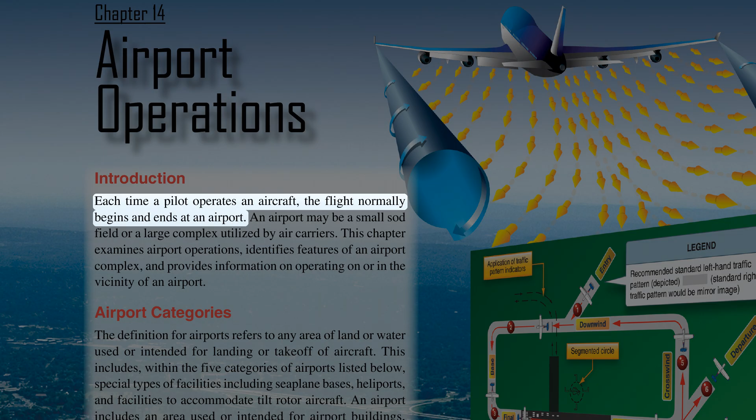Chapter 14, Airport Operations. Introduction. Each time a pilot operates an aircraft, the flight normally begins and ends at an airport. An airport may be a small sod field or a large complex utilized by air carriers. This chapter examines airport operations, identifies features of an airport complex, and provides information on operating on or in the vicinity of an airport.

Airport categories. The definition for airports refers to any area of land or water used or intended for landing or takeoff of aircraft. This includes, within the 5 categories of airports listed below, special types of facilities including seaplane bases, heliports, and facilities to accommodate tilt-rotor aircraft.

An airport includes an area used or intended for airport buildings, facilities, as well as rights-of-way together with the buildings and facilities. The law defines airports by categories of airport activities, including commercial service, primary, cargo service, reliever, and general aviation airports, as shown below.

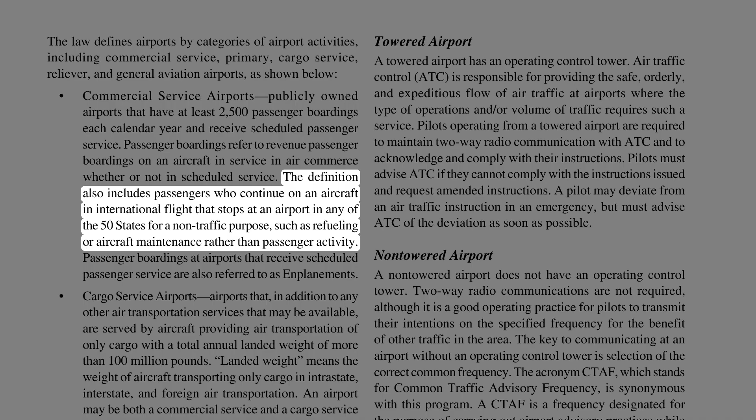Commercial service airports: publicly owned airports that have at least 2,500 passenger boardings each calendar year and receive scheduled passenger service. Passenger boardings refer to revenue passenger boardings on an aircraft in service in air commerce, whether or not in scheduled service. The definition also includes passengers who continue on an aircraft in international flight that stops at an airport in any of the 50 states for a non-traffic purpose, such as refueling or aircraft maintenance rather than passenger activity. Passenger boardings at airports that receive scheduled passenger service are also referred to as enplanements.

Cargo service airports: airports that, in addition to any other air transportation services that may be available, are served by aircraft providing air transportation of only cargo with a total annual landed weight of more than 100 million pounds. Landed weight means the weight of aircraft transporting only cargo in intrastate, interstate, and foreign air transportation. An airport may be both a commercial service and a cargo service airport.

Reliever airports: airports designated by the FAA to relieve congestion at commercial service airports and to provide improved general aviation access to the overall community. These may be publicly or privately owned. General aviation airports: the remaining airports are commonly described as general aviation airports. This airport type is the largest single group of airports in the U.S. system. The category also includes privately owned, public-use airports that enplane 2,500 or more passengers annually and receive scheduled airline service.

Types of airports. There are 2 types of airports, towered and non-towered. These types can be further subdivided to civil airports, airports that are open to the general public; military/federal government airports, airports operated by the military, the National Aeronautics and Space Administration (NASA), or other agencies of the federal government; and private airports, airports designated for private or restricted use only, not open to the general public.

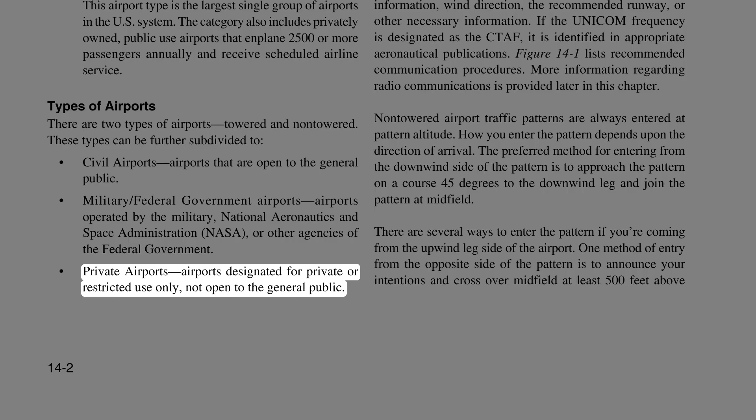Towered airport. A towered airport has an operating control tower. Air traffic control (ATC) is responsible for providing the safe, orderly, and expeditious flow of air traffic at airports where the type of operations and/or volume of traffic requires such a service. Pilots operating from a towered airport are required to maintain 2-way radio communication with ATC and to acknowledge and comply with their instructions. Pilots must advise ATC if they cannot comply with the instructions issued and request amended instructions. A pilot may deviate from an air traffic instruction in an emergency, but must advise ATC of the deviation as soon as possible.

Non-towered airport. A non-towered airport does not have an operating control tower. 2-way radio communications are not required, although it is a good operating practice for pilots to transmit their intentions on the specified frequency for the benefit of other traffic in the area. The key to communicating at an airport without an operating control tower is selection of the correct common frequency. The acronym CTAF, which stands for Common Traffic Advisory Frequency, is synonymous with this program. A CTAF is a frequency designated for the purpose of carrying out airport advisory practices while operating to or from an airport without an operating control tower.

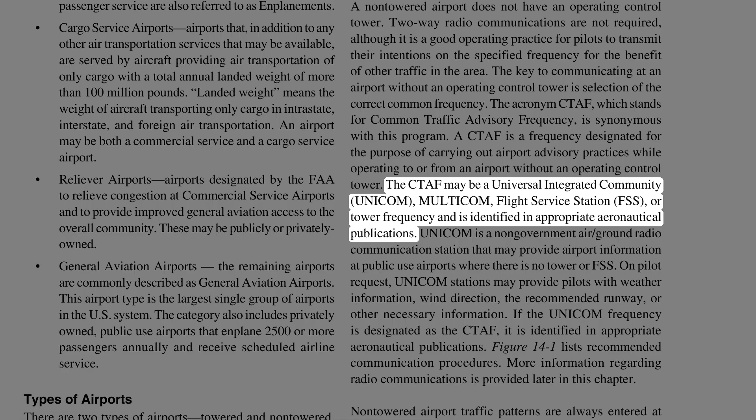The CTAF may be a Universal Integrated Community (UNICOM), MULTICOM, Flight Service Station (FSS), or tower frequency and is identified in appropriate aeronautical publications. UNICOM is a non-government air-ground radio communication station that may provide airport information at public-use airports where there is no tower or FSS. On pilot request, UNICOM stations may provide pilots with weather information, wind direction, the recommended runway, or other necessary information. If the UNICOM frequency is designated as the CTAF, it is identified in appropriate aeronautical publications. Figure 14-1 lists recommended communication procedures. More information regarding radio communications is provided later in this chapter.

Non-towered airport traffic patterns are always entered at pattern altitude. How you enter the pattern depends upon the direction of arrival. The preferred method for entering from the downwind side of the pattern is to approach on a course 45 degrees to the downwind leg and join the pattern at midfield.

There are several ways to enter the pattern if you're coming from the upwind leg side of the airport. One method of entry from the opposite side of the pattern is to announce your intentions and cross over midfield at least 500 feet above pattern altitude, normally 1,500 feet AGL. However, if large or turbine aircraft operate at your airport, it is best to remain 2,000 feet AGL so you are not in conflict with their traffic pattern.

When well clear of the pattern, approximately 2 miles, scan carefully for traffic, descend to pattern altitude, then turn right to enter at 45 degrees to the downwind leg at midfield.

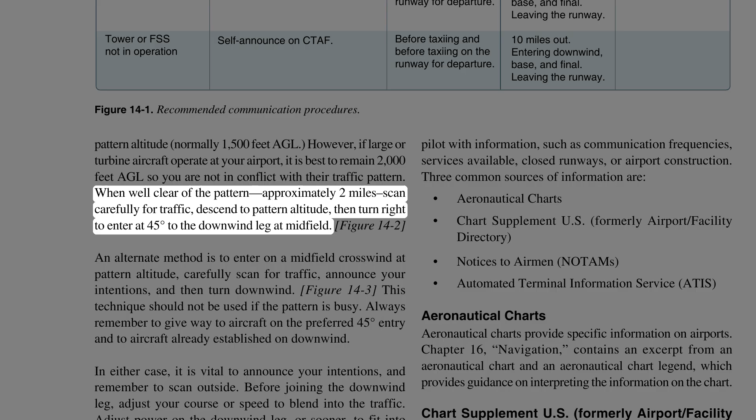An alternate method is to enter on a midfield crosswind at pattern altitude, carefully scan for traffic, announce your intentions, and then turn downwind. This technique should not be used if the pattern is busy. Always remember to give way to aircraft on the preferred 45 degree entry and to aircraft already established on downwind. In either case, it is vital to announce your intentions, and remember to scan outside.

Before joining the downwind leg, adjust your course or speed to blend into the traffic. Adjust power on the downwind leg, or sooner, to fit into the flow of traffic. Avoid flying too fast or too slow. Speeds recommended by the airplane manufacturer should be used. They will generally fall between 70 to 80 knots for fixed-gear singles and 80 to 90 knots for high-performance retractables.

Sources for airport data. When a pilot flies into a different airport, it is important to review the current data for that airport. This data provides the pilot with information such as communication frequencies, services available, closed runways, or airport construction. Three common sources of information are Aeronautical charts, the Chart Supplement US, formerly the Airport Facility Directory, Notices to Airmen (NOTAMs), and the Automated Terminal Information Service (ATIS).

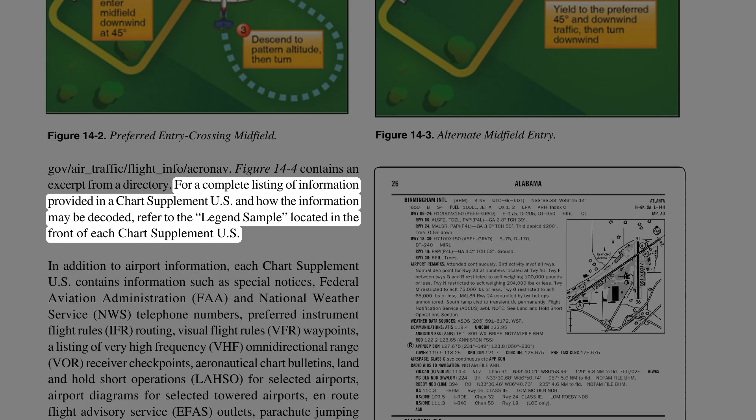Figure 14-4 contains an excerpt from a directory. For a complete listing of information provided in a Chart Supplement US and how the information may be decoded, refer to the legend sample located in the front of each Chart Supplement US. In addition to airport information, each Chart Supplement US contains information such as special notices, FAA, and

National Weather Service telephone numbers, preferred IFR routing, VFR waypoints, a listing of VOR receiver checkpoints, aeronautical chart bulletins, land and hold short operations (LAHSO) for selected airports, airport diagrams for selected towered airports, en route flight advisory service (EFAS) outlets, parachute jumping areas, and facility telephone numbers. It is beneficial to review a Chart Supplement US to become familiar with the information it contains.

Notices to Airmen, NOTAM. Time-critical aeronautical information, which is of a temporary nature and not sufficiently known in advance to permit publication on aeronautical charts or in other operational publications, receives immediate dissemination by the NOTAM system. The NOTAM information could affect your decision to make the flight. It includes information such as taxiway and runway closures, construction, communications, changes in status of navigational aids, and other information essential to planned en route, terminal, or landing operations.

Exercise good judgment and common sense by carefully regarding the information readily available in NOTAMs. Prior to any flight, pilots should check for any NOTAMs that could affect their intended flight. For more information on NOTAMs, refer back to Chapter 1, Pilot and Aeronautical Information section.

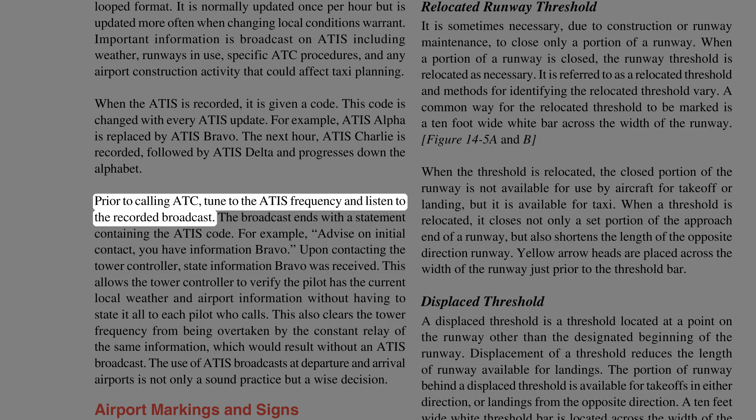Prior to calling ATC, tune to the ATIS frequency and listen to the recorded broadcast. The broadcast ends with a statement containing the ATIS code. For example, advise on initial contact you have information Bravo. Upon contacting the tower controller, state information Bravo was received.

This allows the tower controller to verify the pilot has the current local weather and airport information without having to state it all to each pilot who calls. This also clears the tower frequency from being overtaken by the constant relay of the same information, which would result without an ATIS broadcast. The use of ATIS broadcasts at departure and arrival airports is not only a sound practice but a wise decision.

Airport markings and signs provide directions and assist pilots in airport operations. It is important for you to know the meanings of the signs, markings, and lights used on airports as surface navigational aids.

All airport markings are painted on the surface, whereas some signs are vertical and some are painted on the surface. An overview of the most common signs and markings is described on the following pages. Additional information may be found in Chapter 2, Aeronautical Lighting and Other Airport Visual Aids, of the Aeronautical Information Manual, the AIM.

Runway markings and signs vary depending on the type of operations conducted at the airport. A basic VFR runway may only have centerline markings and runway numbers. Refer to Appendix C of this publication for an example of the most common runway markings found at airports.

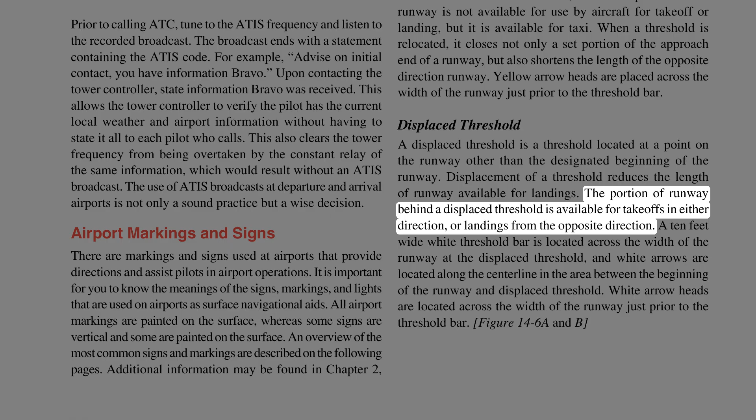Displaced threshold: a displaced threshold is a threshold located at a point on the runway other than the designated beginning of the runway. Displacement of a threshold reduces the length of runway available for landings. The portion of runway behind a displaced threshold is available for takeoffs in either direction, or landings from the opposite direction. A 10-foot wide white threshold bar is located across the width of the runway at the displaced threshold, and white arrows are located along the centerline in the area between the beginning of the runway and the displaced threshold. White arrowheads are located across the width of the runway just prior to the threshold bar.

Runway safety area, or RSA, is a defined surface surrounding the runway prepared, or suitable, for reducing the risk of damage to airplanes in the event of an undershoot, overshoot, or excursion from the runway. The dimensions of the RSA vary and can be determined using the criteria contained within AC 150/5300-13, Airport Design, Chapter 3.

Figure 3-1 in AC 150/5300-13 depicts the RSA. Additionally, it provides greater accessibility for firefighting and rescue equipment in emergency situations. The RSA is typically graded and mowed. Its lateral boundaries are usually identified by the presence of the runway holding position signs and markings on the adjoining taxiway stubs.

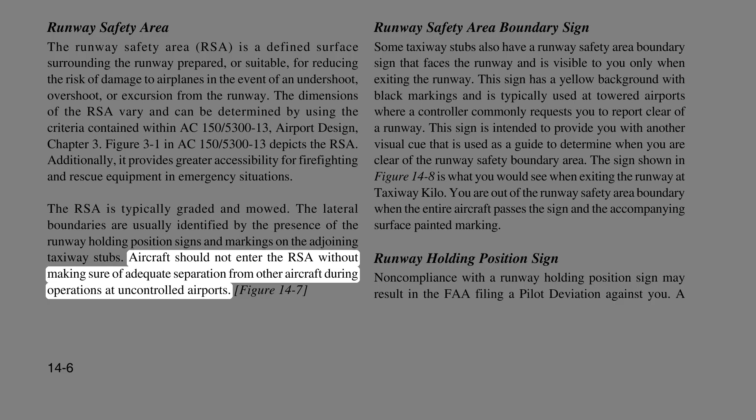Aircraft should not enter the RSA without making sure of adequate separation from other aircraft during operations at uncontrolled airports. Runway Safety Area Boundary Sign: some taxiway stubs also have a runway safety area boundary sign that faces the runway and is visible to you only when exiting the runway.

This sign has a yellow background with black markings and is typically used at towered airports, where a controller commonly requests you to report clear of the runway. This sign is intended to provide you with another visual cue used as a guide to determine when you are clear of the runway safety boundary area.

The sign shown in Figure 14-8 is what you would see when exiting the runway at Taxiway Kilo. You are out of the runway safety area boundary when the entire aircraft passes the sign and the accompanying surface painted marking. Next is the runway holding position sign.

Noncompliance with a runway holding position sign may result in the FAA filing a pilot deviation against you. A runway holding position sign is an airport version of a stop sign. It may be seen as a sign and/or its characters painted on the airport pavement. The sign has white characters outlined in black on a red background. It is always collocated with the surface-painted holding position markings and is located where taxiways intersect runways.

On taxiways that intersect the threshold of the takeoff runway, only the designation of the runway may appear on the sign. If a taxiway intersects a runway somewhere other than at the threshold, the sign has the designation of the intersecting runway. The runway numbers on the sign are arranged to correspond to the relative location of the respective runway thresholds. Figure 14-10 shows 18-36, to indicate the threshold for runway 18 is to the left and the threshold for runway 36 is to the right. The sign also indicates that you are located on taxiway Alpha.

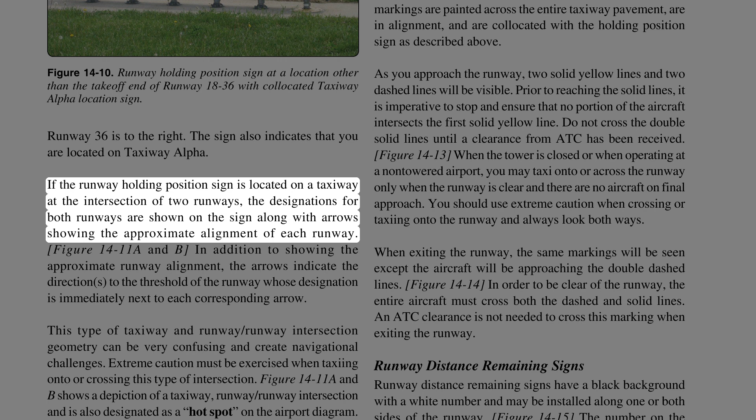If the runway holding position sign is located on a taxiway at the intersection of two runways, the designations for both runways are shown on the sign along with arrows showing the approximate alignment of each runway, as seen in Figure 14-11A and B. In addition to showing the approximate runway alignment, the arrows indicate the directions to the threshold of the runway whose designation is immediately next to each corresponding arrow. This type of taxiway and runway intersection geometry can be very confusing and create navigational challenges. Extreme caution must be exercised when taxiing onto or crossing this type of intersection. Figure 14-11A and B shows a depiction of a taxiway, runway intersection and is also designated as a hotspot on the airport diagram. In the example, taxiway Bravo intersects with two runways, 31-13 and 35-17, which cross each other.

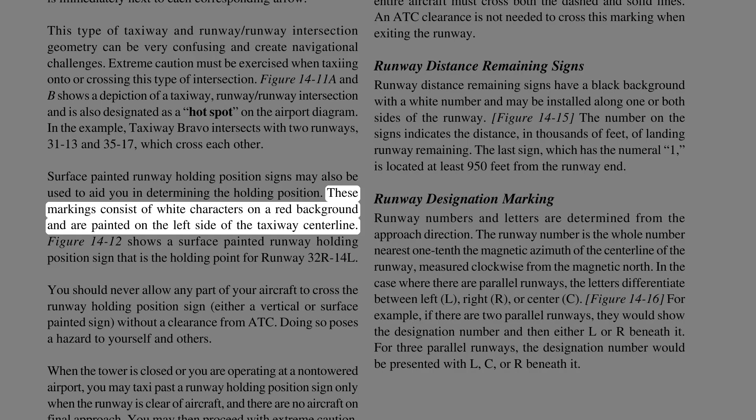Surface-painted runway holding position signs may also be used to aid you in determining the holding position. These markings consist of white characters on a red background and are painted on the left side of the taxiway centerline. Figure 14-12 shows a surface-painted runway holding position sign that is the holding point for runway 32R-14L.

You should never allow any part of your aircraft to cross the runway holding position sign, either a vertical or surface-painted sign, without a clearance from ATC. Doing so poses a hazard to yourself and others. When the tower is closed or you are operating at a non-towered airport, you may taxi past a runway holding position sign only when the runway is clear of aircraft, and there are no aircraft on final approach. You may then proceed with extreme caution.

Runway holding position marking. Noncompliance with a runway holding position marking may result in the FAA filing a pilot deviation against you. Runway holding position markings consist of 4 yellow lines, 2 solid and 2 dashed, that are painted on the surface and extend across the width of the taxiway to indicate where the aircraft should stop when approaching a runway. These markings are painted across the entire taxiway pavement, are in alignment, and are collocated with the holding position sign as described above. As you approach the runway, 2 solid yellow lines and 2 dashed lines will be visible. Prior to reaching the solid lines, it is imperative to stop and ensure that no portion of the aircraft intersects the first solid yellow line.

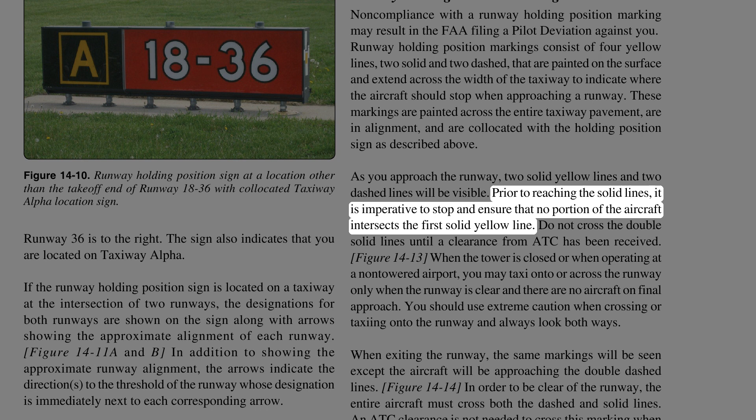Do not cross the double solid lines until a clearance from ATC has been received. When the tower is closed or when operating at a non-towered airport, you may taxi onto or across the runway only when the runway is clear and there are no aircraft on final approach. You should use extreme caution when crossing or taxiing onto the runway and always look both ways. When exiting the runway, the same markings will be seen except the aircraft will be approaching the double dashed lines. In order to be clear of the runway, the entire aircraft must cross both the dashed and solid lines. An ATC clearance is not needed to cross this marking when exiting the runway.

Runway distance remaining signs. Runway distance remaining signs have a black background with a white number and may be installed along one or both sides of the runway. The number on the signs indicates the distance, in thousands of feet, of landing runway remaining. The last sign, which has the numeral 1, is located at least 950 feet from the runway end.

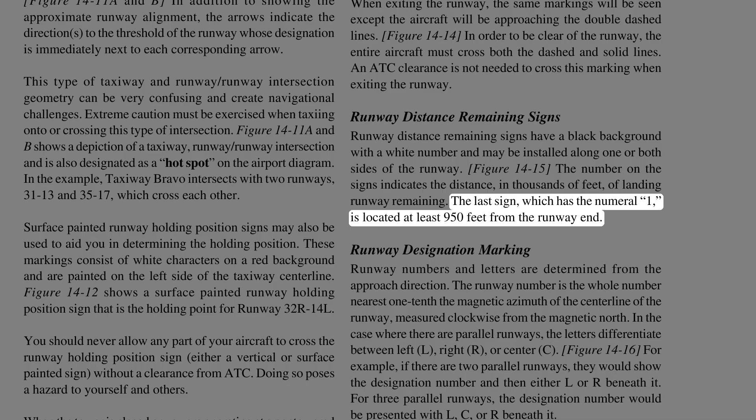Runway designation marking. Runway numbers and letters are determined from the approach direction. The runway number is the whole number nearest 1/10 the magnetic azimuth of the centerline of the runway, measured clockwise from magnetic north. In the case where there are parallel runways, the letters differentiate between left, L, right, R, or center, C. For example, if there are 2 parallel runways, they would show the designation number and then either L or R beneath it. For 3 parallel runways, the designation number would be presented with L, C, or R beneath it. Figure 14-11, A.

Taxiway Bravo location sign collocated with runway intersection holding signs at Sioux Gateway Airport, SUX. This is the airport diagram of Sioux Gateway Airport, SUX, in Sioux City, Iowa.

The area outlined in red is a designated hotspot, HS1. This relates to land and hold short operations, LAHSO.

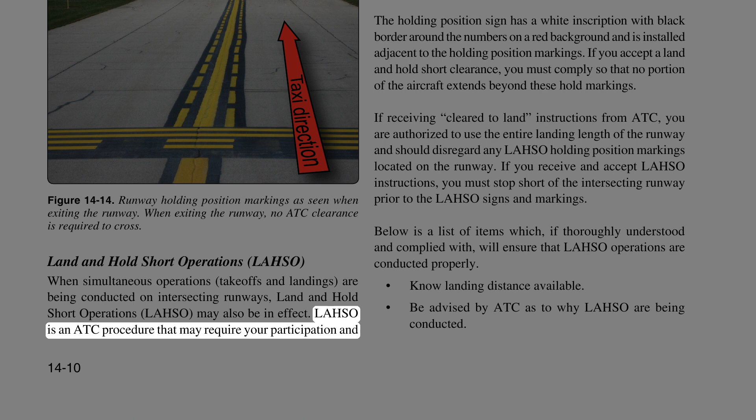When simultaneous operations, takeoffs and landings, are being conducted on intersecting runways, land and hold short operations, LAHSO, may also be in effect. LAHSO is an ATC procedure that may require your participation and compliance. As pilot in command, PIC, you have the final authority to accept or decline any LAHSO clearance. If issued a land and hold short clearance, you must be aware of the reduced runway distances and whether or not you can comply before accepting the clearance. You do not have to accept a LAHSO clearance.

Pilots should only receive a LAHSO clearance when there is a minimum ceiling of 1,000 feet and 3 statute miles of visibility. Runway holding position signs and markings are installed on those runways used for LAHSO. The signs and markings are placed at the LAHSO point to aid you in determining where to stop and hold the aircraft, and are located prior to the runway intersection.

The holding position sign has a white inscription with a black border around the numbers on a red background, and is installed adjacent to the holding position markings. If you accept a land and hold short clearance, you must comply so that no portion of the aircraft extends beyond these hold markings. If receiving cleared to land instructions from ATC, you are authorized to use the entire landing length of the runway and should disregard any LAHSO holding position markings located on the runway.

If you receive and accept LAHSO instructions, you must stop short of the intersecting runway prior to the LAHSO signs and markings. Below is a list of items which, if thoroughly understood and complied with, will ensure that LAHSO operations are conducted properly, including know landing distance available.

Be advised by ATC as to why LAHSO are being conducted. Advise ATC if you cannot comply with LAHSO. Know what signs and markings are at the LAHSO point.

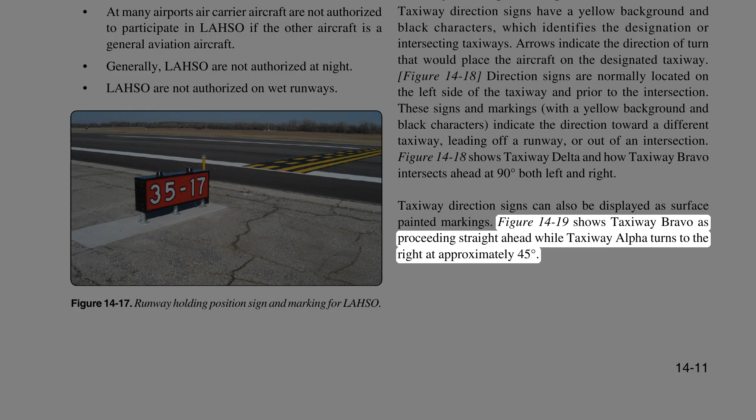Figure 14-18 shows Taxiway Delta and how Taxiway Bravo intersects ahead at 90 degrees, both left and right. Taxiway direction signs can also be displayed as surface painted markings. Figure 14-19 shows Taxiway Bravo proceeding straight ahead, while Taxiway Alpha turns to the right at approximately 45 degrees. Figure 14-20A and B shows an example of a direction sign at a complex taxiway intersection.

Figure 14-20A and B shows Taxiway Bravo intersecting with Taxiway Sierra at 90 degrees, but at 45 degrees with Taxiway Foxtrot. This type of array can be displayed with or without the taxiway location sign, which in this case would be Taxiway Bravo.

Enhanced taxiway centerline markings: at most towered airports, the enhanced taxiway centerline marking is used to warn you of an upcoming runway. It consists of yellow dashed lines on either side of the normal solid taxiway centerline, and the dashes extend up to 150 feet prior to a runway holding position marking, as shown in Figure 14-21A and B. They are used to aid you in maintaining awareness during surface movement to reduce runway incursions.

Destination signs have black characters on a yellow background, indicating a destination at the airport. These signs always have an arrow showing the direction of the taxi route to that destination. When the arrow on the destination sign indicates a turn, the sign is located prior to the intersection.

Destinations commonly shown on these types of signs include runways, aprons, terminals, military areas, civil aviation areas, cargo areas, international areas, and fixed base operators. When the inscription for two or more destinations having a common taxi route are placed on a sign, the destinations are separated by a dot, and one arrow would be used, as shown in Figure 14-22.

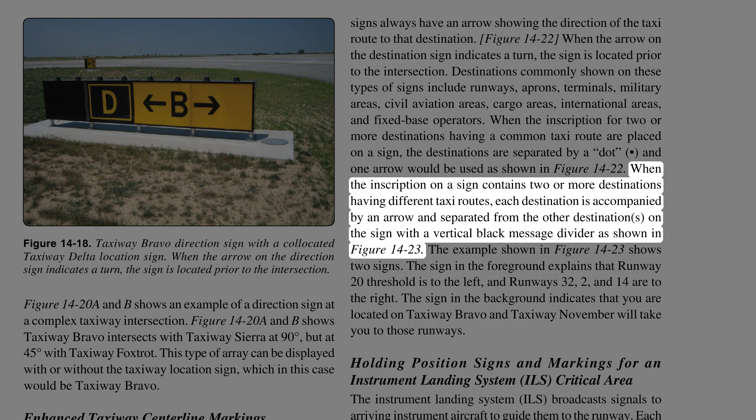When the inscription on a sign contains two or more destinations having different taxi routes, each destination is accompanied by an arrow and separated from the other destinations on the sign with a vertical black message divider, as shown in Figure 14-23.

The example shown in figure 14-23 shows two signs. The sign in the foreground explains that runway 20 threshold is to the left, and runways 32, 2, and 14 are to the right. The sign in the background indicates that you are located on Taxiway Bravo and Taxiway November will take you to those runways.

Holding position signs and markings for an instrument landing system, ILS, critical area. The instrument landing system, ILS, broadcasts signals to arriving instrument aircraft to guide them to the runway. Each of these ILSs have critical areas that must be kept clear of all obstacles in order to ensure quality of the broadcast signal. At many airports, taxiways extend into the ILS critical area. Most of the time, this is of no concern.

However, during times of poor weather, an aircraft on approach may depend on a good signal quality. When necessary, ATC will protect the ILS critical area for arrival instrument traffic by instructing taxiing aircraft to hold short of runway XX ILS critical area. The ILS critical area hold sign has white characters, outlined in black, on a red background and is installed adjacent to the ILS holding position markings.

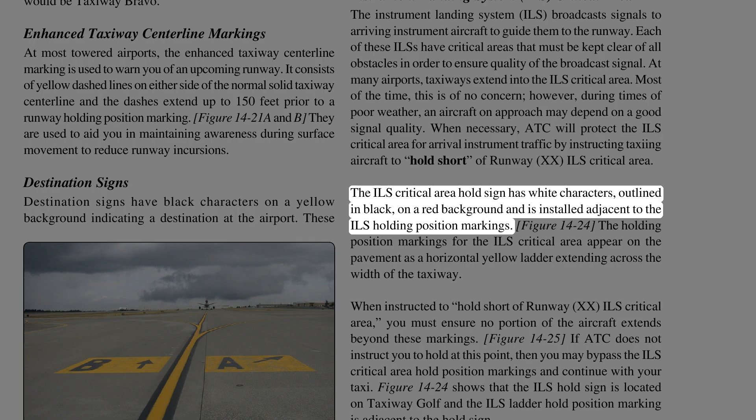The holding position markings for the ILS critical area appear on the pavement as a horizontal yellow ladder extending across the width of the taxiway. When instructed to hold short of runway XX ILS critical area, you must ensure no portion of the aircraft extends beyond these markings. If ATC does not instruct you to hold at this point, then you may bypass the ILS critical area hold position markings and continue with your taxi.

Figure 14-24 shows that the ILS hold sign is located on Taxiway Golf and the ILS ladder hold position marking is adjacent to the hold sign. Figure 14-20. Orientation of signs is from left to right in a clockwise manner. Left turn signs are on the left and right turn on the right. In this view, the pilot is on Taxiway Bravo.

Enhanced taxiway centerline marking extends 150 feet prior to a runway holding position marking. Prepare to stop. Figure 14-21. A. Enhanced taxiway centerline marking. B. Enhanced taxiway centerline marking and runway holding position marking.

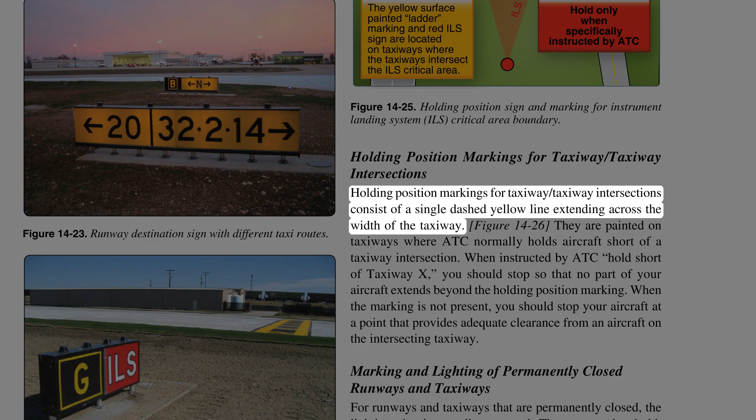Holding position markings for taxiway intersections. Holding position markings for taxiway intersections consist of a single dashed yellow line extending across the width of the taxiway. They are painted on taxiways where ATC normally holds aircraft short of a taxiway intersection. When instructed by ATC, hold short of taxiway X, you should stop so that no part of your aircraft extends beyond the holding position marking. When the marking is not present, you should stop your aircraft at a point that provides adequate clearance from an aircraft on the intersecting taxiway.

Marking and lighting of permanently closed runways and taxiways. For runways and taxiways that are permanently closed, the lighting circuits are disconnected. The runway threshold, runway designation, and touchdown markings are obliterated and yellow X's are placed at each end of the runway and at 1,000-foot intervals.

Temporarily closed runways and taxiways. For temporarily closed runways and taxiways, a visual indication is often provided with yellow X's or raised lighted yellow X's placed at each end of the runway. Depending on the reason for the closure, duration of closure, airfield configuration, and the existence and the hours of operation of an ATC tower, a visual indication may not be present. As discussed previously in the chapter, you must always check NOTAMs and ATIS for runway and taxiway closure information.

Figure 14-27A shows an example of a yellow X laid flat with an adequate number of heavy sandbags to keep the wind from getting under and displacing the vinyl material. A very effective and preferable visual aid to depict temporary closure is the lighted X placed on or near the runway designation numbers. Figure 14-27B and C. This device is much more discernible to approaching aircraft than the other materials described above.

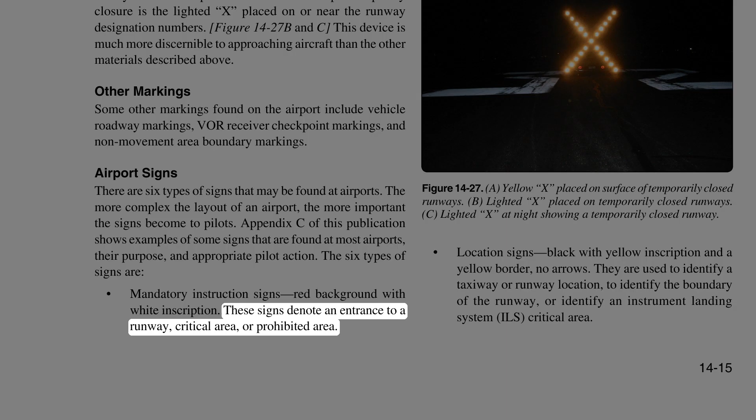The 6 types of signs are mandatory instruction signs, red background with white inscription. These signs denote an entrance to a runway, critical area, or prohibited area. Location signs, black with yellow inscription and a yellow border, no arrows. They are used to identify a taxiway or runway location, to identify the boundary of the runway, or identify an instrument landing system, ILS, critical area.

Direction signs, yellow background with black inscription. The inscription identifies the designation of the intersecting taxiways leading out of an intersection. Destination signs, yellow background with black inscription and arrows. These signs provide information on locating areas, such as runways, terminals, cargo areas, and civil aviation areas.

Information signs, yellow background with black inscription. These signs are used to provide the pilot with information on areas that cannot be seen from the control tower, applicable radio frequencies, and noise abatement procedures. The airport operator determines the need, size, and location of these signs.

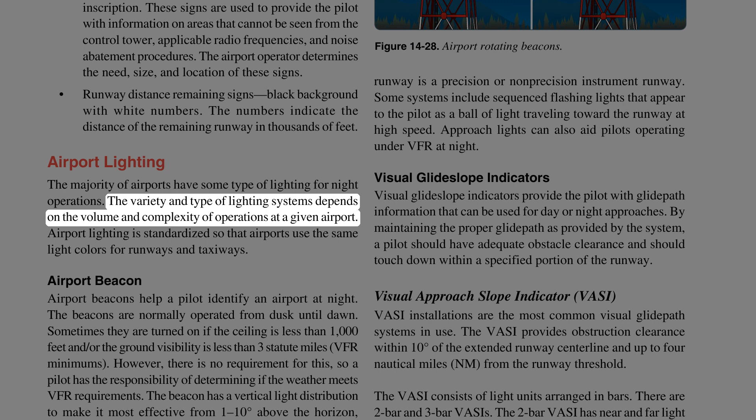Runway distance remaining signs, black background with white numbers. The numbers indicate the distance of the remaining runway in thousands of feet. Airport lighting. The majority of airports have some type of lighting for night operations. The variety and type of lighting systems depends on the volume and complexity of operations at a given airport. Airport lighting is standardized so that airports use the same light colors for runways and taxiways.

Airport beacon. Airport beacons help a pilot identify an airport at night. The beacons are normally operated from dusk until dawn. Sometimes they are turned on if the ceiling is less than 1,000 feet and/or the ground visibility is less than 3 statute miles, VFR minimums. However, there is no requirement for this, so a pilot has the responsibility of determining if the weather meets VFR requirements.

The beacon has a vertical light distribution to make it most effective from 1 to 10 degrees above the horizon, although it can be seen well above or below this spread. The beacon may be an omnidirectional capacitor discharge device, or it may rotate at a constant speed that produces the visual effect of flashes at regular intervals.

The combination of light colors from an airport beacon indicates the type of airport. Some of the most common beacons are flashing white and green for civilian land airports, flashing white and yellow for a water airport, flashing white, yellow, and green for a heliport, and 2 quick white flashes alternating with a green flash identifying a military airport.

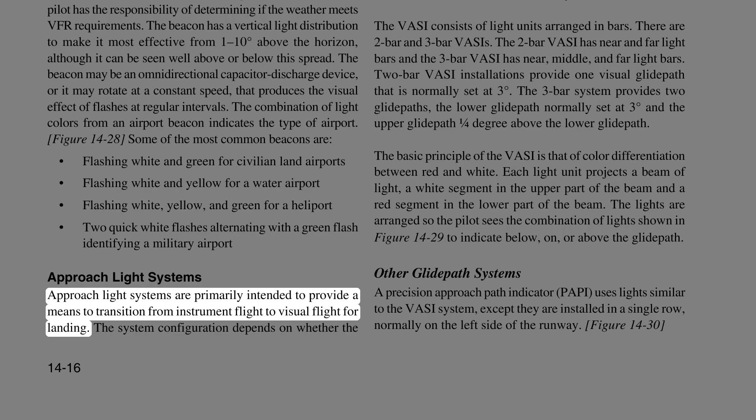Approach light systems. Approach light systems are primarily intended to provide a means to transition from instrument flight to visual flight for landing. The system configuration depends on whether the runway is a precision or non-precision instrument runway. Some systems include sequenced flashing lights that appear to the pilot as a ball of light traveling toward the runway at high speed. Approach lights can also aid pilots operating under VFR at night.

Visual glideslope indicators. Visual glideslope indicators provide the pilot with glidepath information that can be used for day or night approaches. By maintaining the proper glidepath as provided by the system, a pilot should have adequate obstacle clearance and should touch down within a specified portion of the runway.

Visual approach slope indicator, VASI. VASI installations are the most common visual glidepath systems in use. The VASI provides obstruction clearance within 10 degrees of the extended runway centerline and up to 4 nautical miles (NM) from the runway threshold. The VASI consists of light units arranged in bars. There are 2-bar and 3-bar VASIs. The 2-bar VASI has near and far light bars and the 3-bar VASI has near, middle, and far light bars.

2-bar VASI installations provide one visual glidepath that is normally set at 3 degrees. The 3-bar system provides 2 glide paths, the lower glide path normally set at 3 degrees and the upper glide path 1/4 degree above the lower glide path.

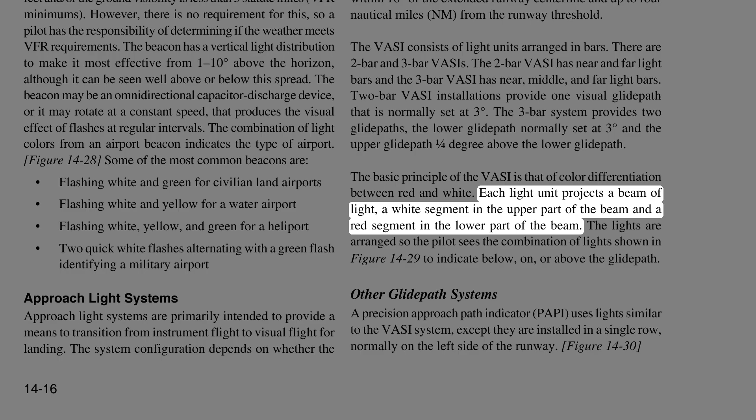The basic principle of the VASI is that of color differentiation between red and white. Each light unit projects a beam of light, a white segment in the upper part of the beam and a red segment in the lower part of the beam. The lights are arranged so the pilot sees the combination of lights shown in figure 14-29 to indicate below, on, or above the glide path.

Other glidepath systems. A precision approach path indicator, PAPI, uses lights similar to the VASI system, except they are installed in a single row, normally on the left side of the runway. A tricolor system consists of a single light unit projecting a 3-color visual approach path. Below the glide path is indicated by red, on the glide path is indicated by green, and above the glide path is indicated by amber. When descending below the glide path, there is a small area of dark amber. Pilots should not mistake this area for an above the glide path indication.

Pulsating VASIs normally consist of a single light unit projecting a two-color visual approach path into the final approach area of the runway upon which the indicator is installed. The on glidepath indication is a steady white light. The slightly below glidepath indication is a steady red light.

If the aircraft descends further below the glidepath, the red light starts to pulsate. The above glidepath indication is a pulsating white light. The pulsating rate increases as the aircraft gets further above or below the desired glide slope. The useful range of the system is about 4 miles during the day and up to 10 miles at night.

Runway lighting. There are various lights that identify parts of the runway complex. These assist a pilot in safely making a takeoff or landing during night operations. Runway End Identifier Lights, REIL. Runway End Identifier Lights, REIL, are installed at many airfields to provide rapid and positive identification of the approach end of a particular runway. The system consists of a pair of synchronized flashing lights located laterally on each side of the runway threshold. REILs may be either omnidirectional or unidirectional facing the approach area.

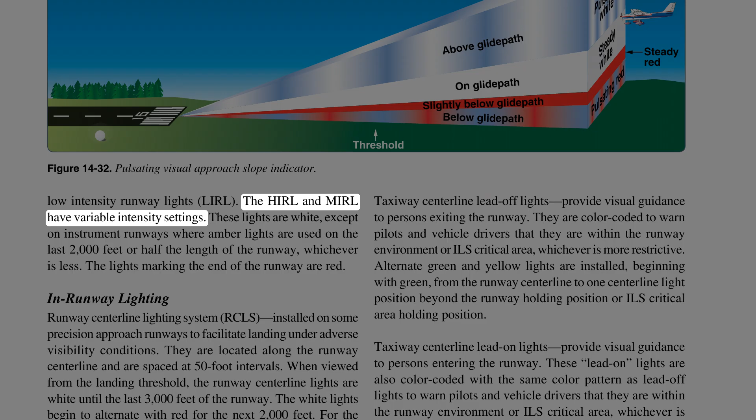Runway Edge Lights. Runway edge lights are used to outline the edges of runways at night or during low visibility conditions. These lights are classified according to the intensity they are capable of producing: high-intensity runway lights, HIRL, medium-intensity runway lights, MIRL, and low-intensity runway lights, LIRL. The HIRL and MIRL have variable intensity settings. These lights are white, except on instrument runways where amber lights are used on the last 2,000 feet or half the length of the runway, whichever is less. The lights marking the end of the runway are red.

In runway lighting, Runway Centerline Lighting System, RCLS, installed on some precision approach runways to facilitate landing under adverse visibility conditions. They are located along the runway centerline and are spaced at 50-foot intervals. When viewed from the landing threshold, the runway centerline lights are white until the last 3,000 feet of the runway. The white lights begin to alternate with red for the next 2,000 feet. For the remaining 1,000 feet of the runway, all centerline lights are red.

Touchdown Zone Lights, TDZL, installed on some precision approach runways to indicate the touchdown zone when landing under adverse visibility conditions. They consist of 2 rows of transverse light bars disposed symmetrically about the runway centerline. The system consists of steady burning white lights that start 100 feet beyond the landing threshold and extend to 3,000 feet beyond the landing threshold or to the midpoint of the runway, whichever is less.

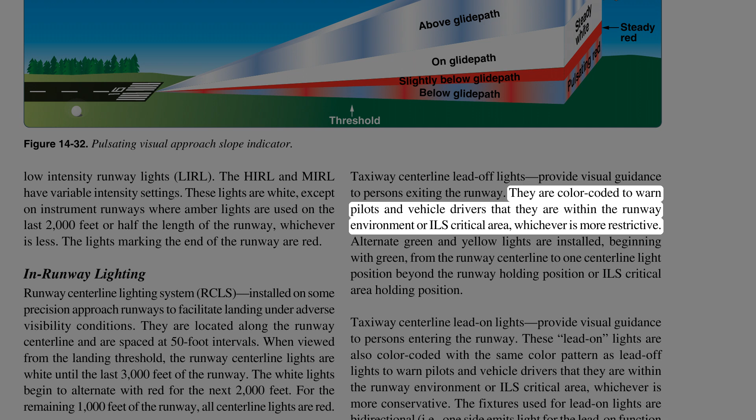Taxiway centerline lead-off lights provide visual guidance to persons exiting the runway. They are color-coded to warn pilots and vehicle drivers that they are within the runway environment or ILS critical area, whichever is more restrictive. Alternate green and yellow lights are installed, beginning with green, from the runway centerline to one centerline light position beyond the runway holding position or ILS critical area holding position.

Taxiway centerline lead-on lights provide visual guidance to persons entering the runway. These lead-on lights are also color-coded with the same color pattern as lead-off lights to warn pilots and vehicle drivers that they are within the runway environment or ILS critical area, whichever is more conservative. The fixtures used for lead-on lights are bidirectional, i.e., one side emits light for the lead-on function while the other side emits light for the lead-off function. Any fixture that emits yellow light for the lead-off function also emits yellow light for the lead-on function.

Land and hold short lights, used to indicate the hold short point on certain runways which are approved for LAHSO. Land and hold short lights consist of a row of pulsing white lights installed across the runway at the hold short point. Where installed, the lights are on anytime LAHSO is in effect. These lights are off when LAHSO is not in effect.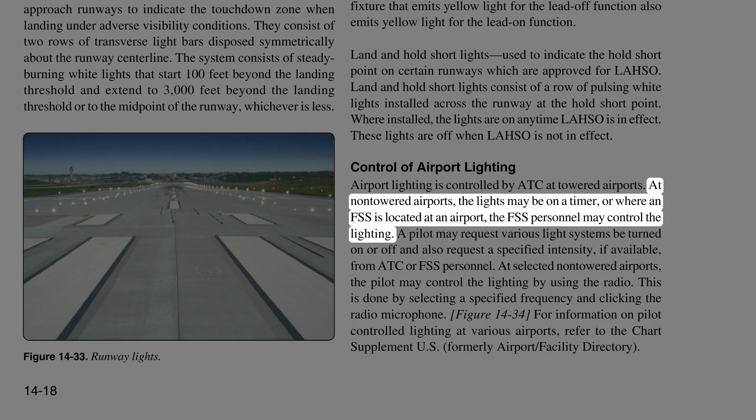Control of airport lighting. Airport lighting is controlled by ATC at towered airports. At non-towered airports, the lights may be on a timer, or where an FSS is located at an airport, the FSS personnel may control the lighting. A pilot may request various light systems be turned on or off and also request a specified intensity, if available, from ATC or FSS personnel.

At selected non-towered airports, the pilot may control the lighting by using the radio. This is done by selecting a specified frequency and clicking the radio microphone. For information on pilot-controlled lighting at various airports, refer to the Chart Supplement U.S., formerly Airport/Facility Directory.

Taxiway lights. Similar to runway lighting, taxiways also have various lights which help pilots identify areas of the taxiway and any surrounding runways. Omnidirectional. Omnidirectional taxiway lights outline the edges of the taxiway and are blue in color. At many airports, these edge lights may have variable intensity settings that may be adjusted by ATC when deemed necessary or when requested by the pilot. Some airports also have taxiway centerline lights that are green in color.

Clearance bar lights. Clearance bar lights are installed at holding positions on taxiways in order to increase the conspicuity of the holding position in low visibility conditions.

They may also be installed to indicate the location of an intersecting taxiway during periods of darkness. Clearance bars consist of 3 in-pavement steady burning yellow lights.

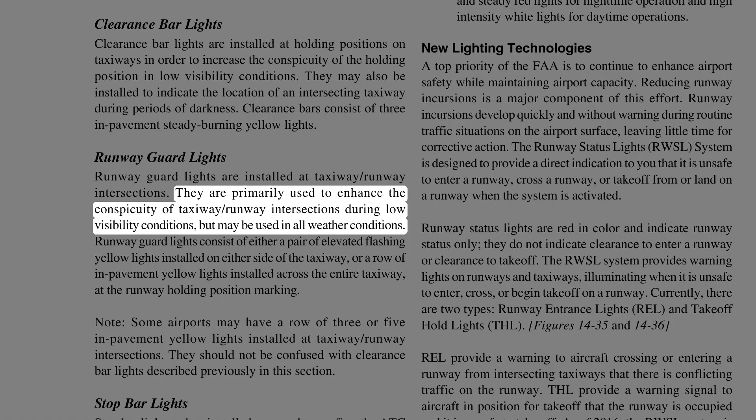Runway guard lights. Runway guard lights are installed at taxiway/runway intersections. They are primarily used to enhance the conspicuity of taxiway/runway intersections during low visibility conditions, but may be used in all weather conditions. Runway guard lights consist of either a pair of elevated flashing yellow lights installed on either side of the taxiway, or a row of in-pavement yellow lights installed across the entire taxiway, at the runway holding position marking. Note: some airports may have a row of 3 or 5 in-pavement yellow lights installed at taxiway/runway intersections. They should not be confused with clearance bar lights described previously in this section.

Stop bar lights. Stop bar lights, when installed, are used to confirm the ATC clearance to enter or cross the active runway in low visibility conditions, below 1,200 feet runway visual range (RVR). A stop bar consists of a row of red, unidirectional, steady burning in-pavement lights installed across the entire taxiway at the runway holding position, and elevated steady burning red lights on each side.

A controlled stop bar is operated in conjunction with the taxiway centerline lead-on lights which extend from the stop bar toward the runway. Following the ATC clearance to proceed, the stop bar is turned off and the lead-on lights are turned on. The stop bar and lead-on lights are automatically reset by a sensor or backup timer.

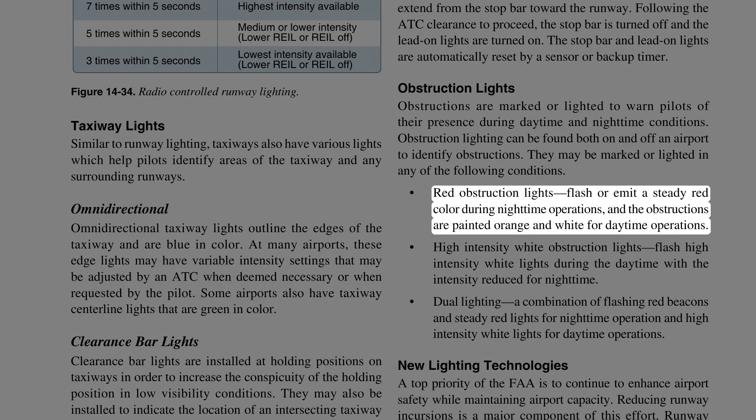Obstruction lights. Obstructions are marked or lighted to warn pilots of their presence during daytime and nighttime conditions. Obstruction lighting can be found both on and off an airport to identify obstructions. They may be marked or lighted in any of the following conditions. Red obstruction lights flash or emit a steady red color during nighttime operations, and the obstructions are painted orange and white for daytime operations. High-intensity white obstruction lights flash high-intensity white lights during the daytime with the intensity reduced for nighttime. Dual lighting, a combination of flashing red beacons and steady red lights for nighttime operation and high-intensity white lights for daytime operations.

New lighting technologies. A top priority of the FAA is to continue to enhance airport safety while maintaining airport capacity. Reducing runway incursions is a major component of this effort. Runway incursions develop quickly and without warning during routine traffic situations on the airport surface, leaving little time for corrective action. The Runway Status Lights (RWSL) system is designed to provide a direct indication to you that it is unsafe to enter a runway, cross a runway, or take off from or land on a runway when the system is activated. Runway status lights are red in color and indicate runway status only. They do not indicate clearance to enter a runway or clearance to take off.

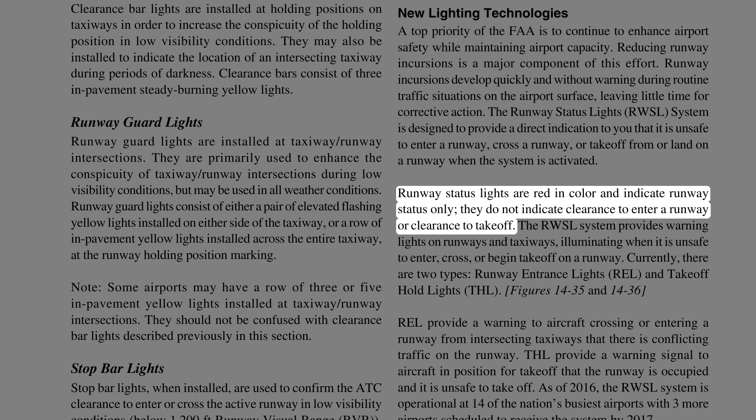The RWSL system provides warning lights on runways and taxiways, illuminating when it is unsafe to enter, cross, or begin takeoff on a runway. Currently, there are 2 types: runway entrance lights (REL) and takeoff hold lights (THL). Figures 14-35 and 14-36. REL provide a warning to aircraft crossing or entering a runway from intersecting taxiways that there is conflicting traffic on the runway. THL provide a warning signal to aircraft in position for takeoff that the runway is occupied and it is unsafe to take off. As of 2016, the RWSL system is operational at 14 of the nation's busiest airports, with 3 more airports scheduled to receive the system by 2017.

Wind direction indicators. It is important for a pilot to know the direction of the wind. At facilities with an operating control tower, this information is provided by ATC. Information may also be provided by FSS personnel either located at a particular airport or remotely available through a remote communication outlet (RCO), or by requesting information on a CTAF at airports that have the capacity to receive and broadcast on this frequency. When none of these services is available, it is possible to determine wind direction and runway in use by visual wind indicators. A pilot should check these wind indicators even when information is provided on the CTAF at a given airport, because there is no assurance that the information provided is accurate.

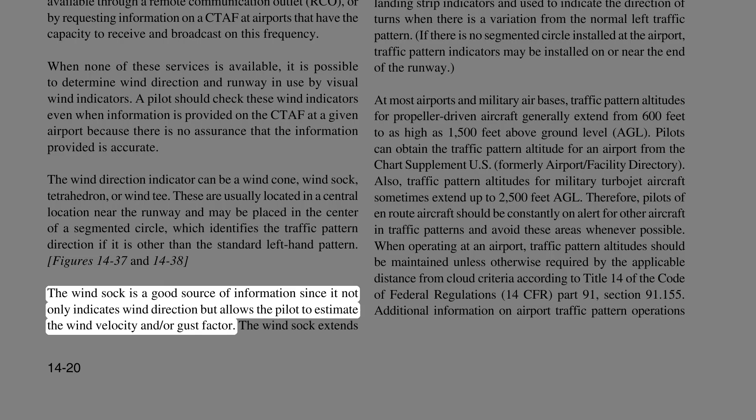The wind direction indicator can be a wind cone, wind sock, tetrahedron, or wind tee. These are usually located in a central location near the runway and may be placed in the center of a segmented circle, which identifies the traffic pattern direction if it is other than the standard left-hand pattern. The wind sock is a good source of information since it not only indicates wind direction but allows the pilot to estimate the wind velocity and/or gust factor. The wind sock extends out straighter in strong winds and tends to move back and forth when the wind is gusting.

Wind Ts and tetrahedrons can swing freely and align themselves with the wind direction. Since a wind T or tetrahedron can also be manually set to align with the runway in use, a pilot should also look at the wind sock for wind information, if one is available.

Traffic patterns. At airports without an operating control tower, a segmented circle visual indicator system, if installed, is designed to provide traffic pattern information. Usually located in a position affording maximum visibility to pilots in the air and on the ground, and providing a centralized location for other elements of the system, the segmented circle consists of the following components: wind direction indicators, landing direction indicators, landing strip indicators, and traffic pattern indicators.

A tetrahedron is installed to indicate the direction of landings and takeoffs when conditions at the airport warrant its use. It may be located at the center of a segmented circle and may be lighted for night operations. The small end of the tetrahedron points in the direction of landing. Pilots are cautioned against using a tetrahedron for any purpose other than as an indicator of landing direction. At airports with control towers, the tetrahedron should only be referenced when the control tower is not in operation. Tower instructions supersede tetrahedron indications.

Landing strip indicators are installed in pairs and are used to show the alignment of landing strips. Traffic pattern indicators are arranged in pairs in conjunction with landing strip indicators, and used to indicate the direction of turns when there is a variation from the normal left traffic pattern. If there is no segmented circle installed at the airport, traffic pattern indicators may be installed on or near the end of the runway.

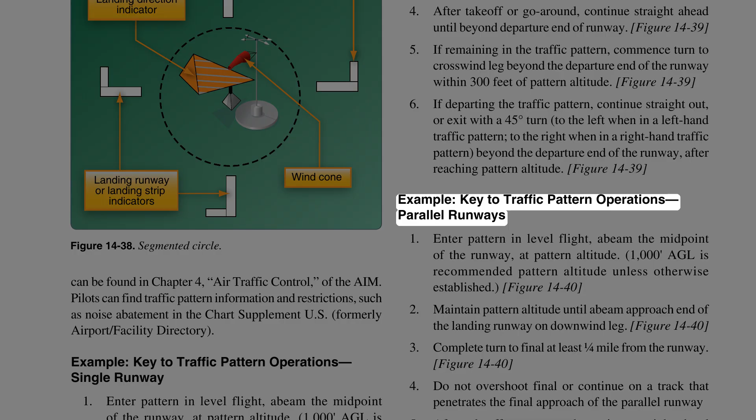Example: key to traffic pattern operations, parallel runways. If remaining in the traffic pattern, commence turn to crosswind leg beyond the departure end of the runway within 300 feet of pattern altitude. If departing the traffic pattern, continue straight out, or exit with a 45 degrees turn, to the left when in a left-hand traffic pattern, to the right when in a right-hand traffic pattern, beyond the departure end of the runway, after reaching pattern altitude. Do not continue on a track that penetrates the departure path of the parallel runway.

Radio communications. Operating in and out of a towered airport, as well as in a good portion of the airspace system, requires that an aircraft have two-way radio communication capability. For this reason, a pilot should be knowledgeable of radio station license requirements and radio communications equipment and procedures.

Radio license. There is no license requirement for a pilot operating in the United States. However, a pilot who operates internationally is required to hold a restricted radio telephone permit issued by the Federal Communications Commission, FCC. There is also no station license requirement for most general aviation aircraft operating in the United States. A station license is required, however, for an aircraft that is operating internationally, that uses other than a VHF radio, and that meets other criteria.

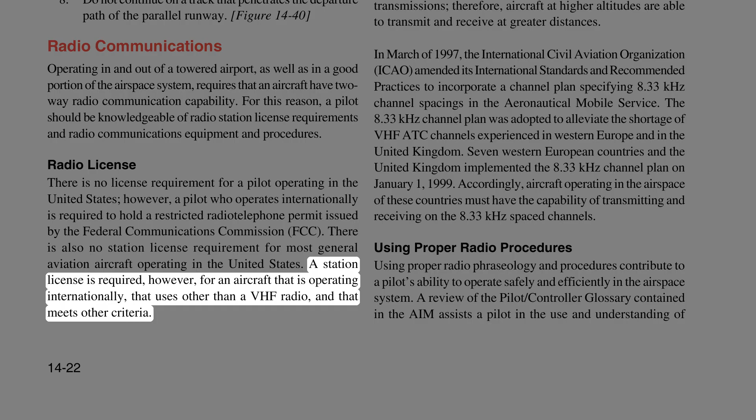In general aviation, the most common types of radios are VHF. A VHF radio operates on frequencies between 118.0 MHz and 136.975 MHz and is classified as 720 or 760 depending on the number of channels it can accommodate.

The 720 and 760 use 0.025 MHz, or 25 kHz, spacing, such as 118.025 and 118.050, with the 720 having a frequency range up to 135.975 MHz and the 760 reaching up to 136.975 MHz.

VHF radios are limited to line-of-sight transmissions, therefore aircraft at higher altitudes are able to transmit and receive at greater distances. In March of 1997, the International Civil Aviation Organization, ICAO, amended its international standards and recommended practices to incorporate a channel plan.

specifying 8.33 kHz channel spacings in the aeronautical mobile service. The 8.33 kHz channel plan was adopted to alleviate the shortage of VHF ATC channels experienced in Western Europe and the United Kingdom. Seven Western European countries and the United Kingdom implemented the 8.33 kHz channel plan on January 1, 1999. Accordingly, aircraft operating in the airspace of these countries must have the capability of transmitting and receiving on the 8.33 kHz spaced channels.

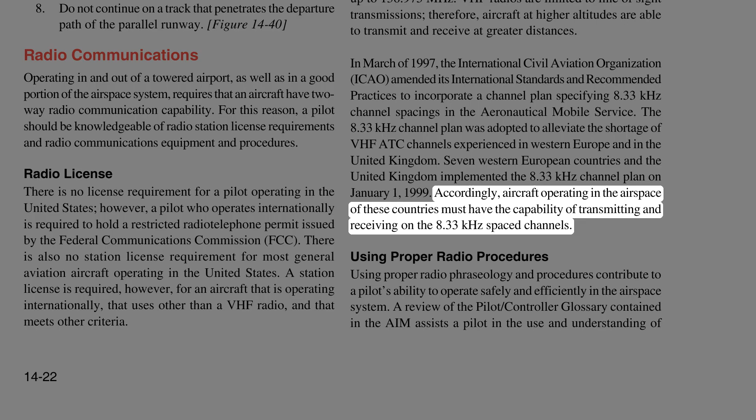Using proper radio phraseology and procedures contributes to a pilot's ability to operate safely and efficiently in the airspace system. A review of the pilot-controller glossary contained in the AIM assists a pilot in the use and understanding of standard terminology. The AIM also contains many examples of radio communications.

ICAO has adopted a phonetic alphabet that should be used in radio communications. When communicating with ATC, pilots should use this alphabet to identify their aircraft.

Lost communication procedures. It is possible that a pilot might experience a malfunction of the radio. This might cause the transmitter, receiver, or both to become inoperative. If a receiver becomes inoperative and a pilot needs to land at a towered airport, it is advisable to remain outside or above Class D airspace until the direction and flow of traffic is determined.

A pilot should then advise the tower of the aircraft type, position, altitude, and intention to land. The pilot should continue, enter the pattern, report a position as appropriate, and watch for light signals from the tower. Light signal colors and their meanings are contained in Figure 14-42.

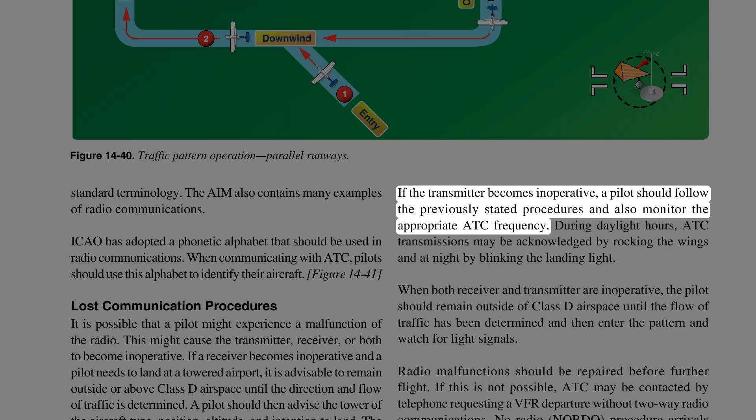If the transmitter becomes inoperative, a pilot should follow the previously stated procedures and also monitor the appropriate ATC frequency. During daylight hours, ATC transmissions may be acknowledged by rocking the wings, and at night by blinking the landing light.

When both receiver and transmitter are inoperative, the pilot should remain outside of Class D airspace until the flow of traffic has been determined, and then enter the pattern and watch for light signals. Radio malfunctions should be repaired before further flight.

If this is not possible, ATC may be contacted by telephone requesting a VFR departure without two-way radio communications. No radio, NORDO, procedure arrivals are not accepted at busy airports. If authorization is given to depart, the pilot is advised to monitor the appropriate frequency and/or watch for light signals as appropriate.

If radio communication is lost, it may be a prudent decision to land at a non-towered airport with lower traffic volume, if practical. When operating at a non-towered airport, no radio communication is necessary. However, pilots should be extra vigilant when not using the radio, since other traffic may not as easily be aware of your presence when they are expecting the standard radio calls.

Air Traffic Control, ATC, services. Besides the services provided by an FSS, as discussed in Chapter 13, Aviation Weather Services, numerous other services are provided by ATC. In many instances a pilot is required to have contact with ATC, but even when not required, a pilot may find their services helpful.

Primary radar. Radar is a device that provides information on range, azimuth, and/or elevation of objects in the path of the transmitted pulses. It measures the time interval between transmission and reception of radio pulses and correlates the angular orientation of the radiated antenna beam or beams in azimuth and/or elevation.

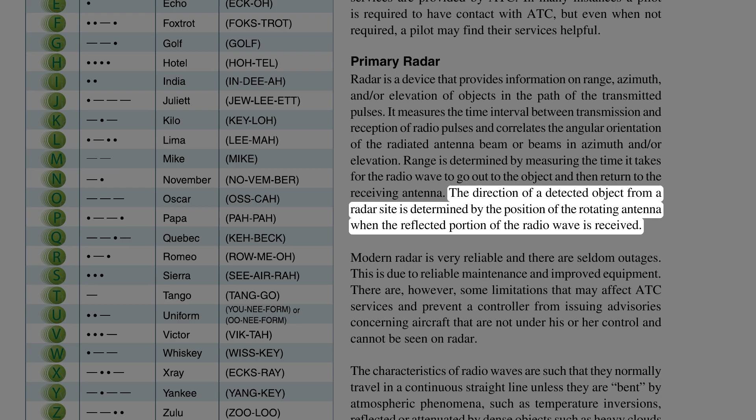Range is determined by measuring the time it takes for the radio wave to go out to the object and then return to the receiving antenna. The direction of a detected object from a radar site is determined by the position of the rotating antenna when the reflected portion of the radio wave is received.

Modern radar is very reliable and there are seldom outages. This is due to reliable maintenance and improved equipment. There are, however, some limitations that may affect ATC services and prevent a controller from issuing advisories concerning aircraft that are not under his or her control and cannot be seen on radar.

The characteristics of radio waves are such that they normally travel in a continuous straight line unless they are bent by atmospheric phenomena, such as temperature inversions, reflected or attenuated by dense objects such as heavy clouds and precipitation, or screened by high terrain features.

Radar signals degrade over distance, cannot penetrate through solid objects such as mountains, and the fastest radar updates every 4.7 seconds. By contrast, the satellite signals used with Automatic Dependent Surveillance-Broadcast, ADS-B, do not degrade over distance, provide better visibility around mountainous terrain, and allow equipped aircraft to update their own position once a second with better accuracy.

ATC Radar Beacon System, ATCRBS, is often referred to as secondary surveillance radar. This system consists of three components and helps alleviate some of the limitations associated with primary radar. The three components are an interrogator, transponder, and radarscope. The advantages of ATCRBS are reinforcement of radar targets, rapid target identification, and a unique display of selected codes.

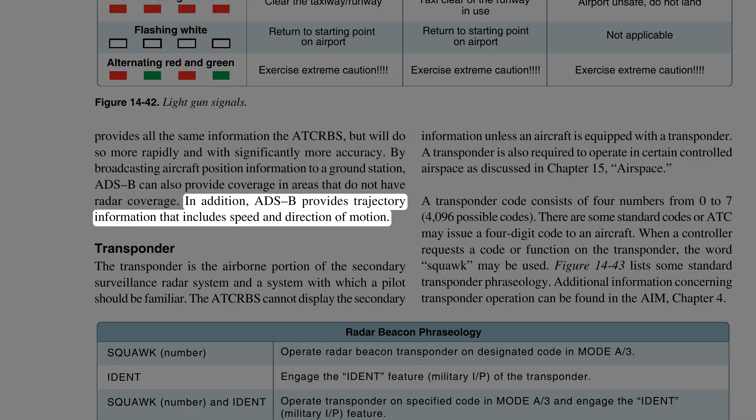Growing air traffic in the National Airspace System, NAS, will be addressed through the use of ADS-B, which not only provides all the same information as ATCRBS, but will do so more rapidly and with significantly more accuracy. By broadcasting aircraft position information to a ground station, ADS-B can also provide coverage in areas that do not have radar coverage. In addition, ADS-B provides trajectory information that includes speed and direction of motion.

Transponder. The transponder is the airborne portion of the secondary surveillance radar system and a system with which a pilot should be familiar. The ATCRBS cannot display the secondary information unless an aircraft is equipped with a transponder. A transponder is also required to operate in certain controlled airspace, as discussed in Chapter 15, Airspace. A transponder code consists of four numbers from 0 to 7, giving 4096 possible codes. There are some standard codes, or ATC may issue a 4-digit code to an aircraft. When a controller requests a code or function on the transponder, the word squawk may be used. Figure 14-43 lists some standard transponder phraseology. Additional information concerning transponder operation can be found in the AIM, Chapter 4.

Automatic Dependent Surveillance-Broadcast, ADS-B, is a surveillance technology being deployed throughout the NAS to facilitate improvements needed to increase the capacity and efficiency of the NAS while maintaining safety. ADS-B supports these improvements by providing a higher update rate and enhanced accuracy of surveillance information over the current radar-based surveillance system. In addition, ADS-B enables the expansion of air traffic control, ATC, surveillance services into areas where none existed previously. The ADS-B ground system also provides Traffic Information Services Broadcast, TIS-B, and Flight Information Services Broadcast, FIS-B, for use on appropriately equipped aircraft, enhancing the user's situational awareness, SA, and improving the overall safety of the NAS.

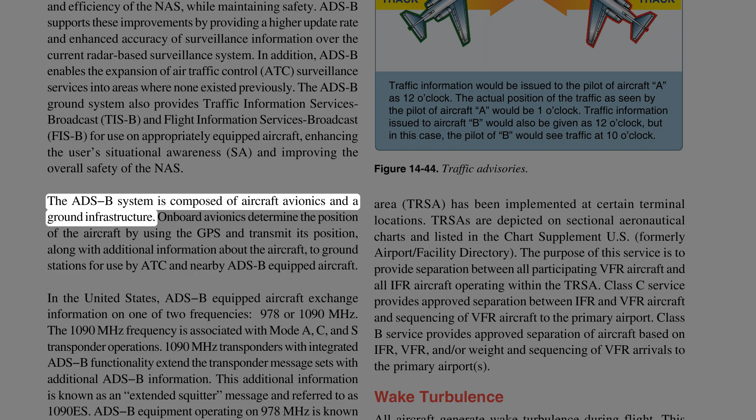The ADS-B system is composed of aircraft avionics and a ground infrastructure. Onboard avionics determine the position of the aircraft using GPS and transmit its position, along with additional information about the aircraft, to ground stations for use by ATC and nearby ADS-B equipped aircraft.

In the United States, ADS-B equipped aircraft exchange information on one of two frequencies, 978 or 1090 MHz. The 1090 MHz frequency is associated with Mode A, C, and S transponder operations. 1090 MHz transponders with integrated ADS-B functionality extend the transponder message sets with additional ADS-B information. This additional information is known as an extended squitter message and is referred to as 1090ES. ADS-B equipment operating on 978 MHz is known as the Universal Access Transceiver, UAT.

Radar Traffic Advisories. Radar-equipped ATC facilities provide radar assistance to aircraft on instrument flight plans and VFR aircraft, provided the aircraft can communicate with the facility and are within radar coverage. This basic service includes safety alerts, traffic advisories, limited vectoring when requested, and sequencing at locations where this procedure has been established. ATC issues traffic advisories based on observed radar targets.

The traffic is referenced by azimuth from the aircraft in terms of the 12-hour clock. Also, distance in nautical miles, direction in which the target is moving, and type and altitude of the aircraft, if known, are given. An example would be: traffic, 10 o'clock, 5 miles, eastbound, Cessna 152, 3,000 feet. The pilot should note that traffic position is based on the aircraft track and that wind correction can affect the clock position at which a pilot locates traffic. This service is not intended to relieve the pilot of the responsibility to see and avoid other aircraft.

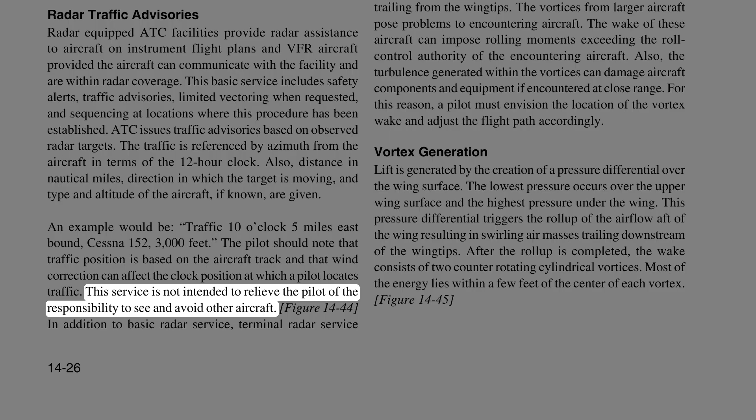In addition to basic radar service, Terminal Radar Service Area, TRSA, has been implemented at certain terminal locations. TRSAs are depicted on sectional aeronautical charts and listed in the Chart Supplement US, formerly Airport/Facility Directory. The purpose of this service is to provide separation between all participating VFR aircraft and all IFR aircraft operating within the TRSA. Class C service provides approved separation between IFR and VFR aircraft and sequencing of VFR aircraft to the primary airport.

Class B service provides approved separation of aircraft based on IFR, VFR, and/or weight, and sequencing of VFR arrivals to the primary airports. Wake turbulence.

All aircraft generate wake turbulence during flight. This disturbance is caused by a pair of counter-rotating vortices trailing from the wingtips. The vortices from larger aircraft pose problems to encountering aircraft. The wake of these aircraft can impose rolling moments exceeding the roll control authority of the encountering aircraft. Also, the turbulence generated within the vortices can damage aircraft components and equipment if encountered at close range. For this reason, a pilot must envision the location of the vortex wake and adjust the flight path accordingly.

Vortex generation. Lift is generated by the creation of a pressure differential over the wing surface. The lowest pressure occurs over the upper wing surface and the highest pressure under the wing. This pressure differential triggers the roll-up of the airflow aft of the wing, resulting in swirling air masses trailing downstream of the wingtips. After the roll-up is completed, the wake consists of two counter-rotating cylindrical vortices. Most of the energy lies within a few feet of the center of each vortex.

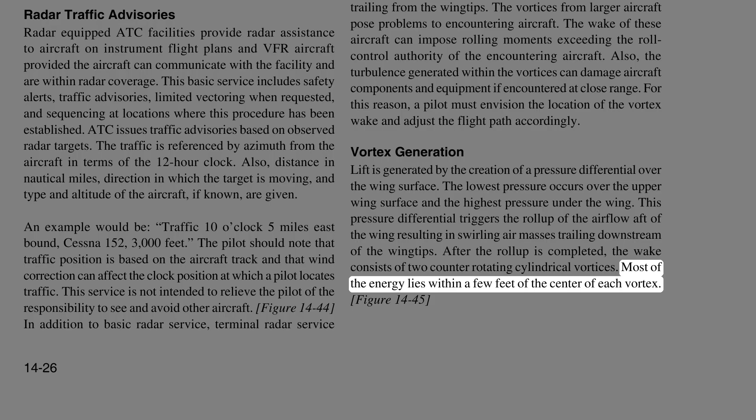Vortex strength in the terminal area. Wake turbulence has historically been thought of as only a function of aircraft weight, but recent research considers additional parameters, such as speed, aspects of the wing, wake decay rates, and aircraft resistance to wake, just to name a few. The vortex characteristics of any aircraft will be changed with the extension of flaps or other wing configuration devices, as well as changing speed. However, as the basic factors are weight and speed, the vortex strength increases proportionately with an increase in aircraft operating weight or decrease in aircraft speed. The greatest vortex strength occurs when the generating aircraft is heavy, slow, and clean, since the turbulence from a dirty aircraft configuration hastens wake decay.

En route wake turbulence events have been influenced by changes to the aircraft fleet mix, which now includes more super aircraft like the A380, and heavy aircraft like the B747, B777, A340, etc., operating in the NAS. There have been wake turbulence events in excess of 30 nautical miles and 2,000 feet lower than the wake-generating aircraft.

Air density is also a factor in wake strength. Even though the speeds are higher in cruise at high altitude, the reduced air density may result in wake strength comparable to that in the terminal area. In addition, for a given separation distance, the higher speeds in cruise result in less time for the wake to decay before being encountered by a trailing aircraft.

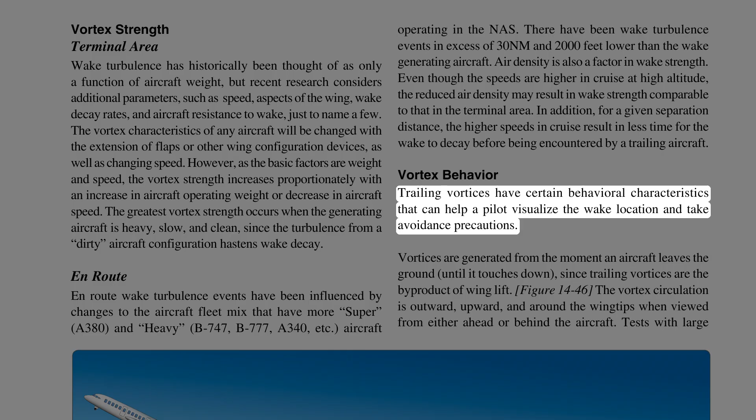Vortex behavior. Trailing vortices have certain behavioral characteristics that can help a pilot visualize the wake location and take avoidance precautions. Vortices are generated from the moment an aircraft leaves the ground until it touches down, since trailing vortices are the byproduct of wing lift. The vortex circulation is outward, upward, and around the wingtips when viewed from either ahead or behind the aircraft.

Tests with large aircraft have shown that vortices remain spaced a bit less than a wingspan apart, drifting with the wind, at altitudes greater than a wingspan from the ground. Tests have also shown that the vortices sink at a rate of several hundred feet per minute, slowing their descent and diminishing in strength with time and distance behind the generating aircraft. When the vortices of larger aircraft sink close to the ground, within 100 to 200 feet, they tend to move laterally over the ground at a speed of 2 to 3 knots.

A crosswind decreases the lateral movement of the upwind vortex and increases the movement of the downwind vortex. A light quartering tailwind presents the worst-case scenario, as the wake vortices could be present along a significant portion of the final approach and extended centerline, and not just in the touchdown zone as typically expected.

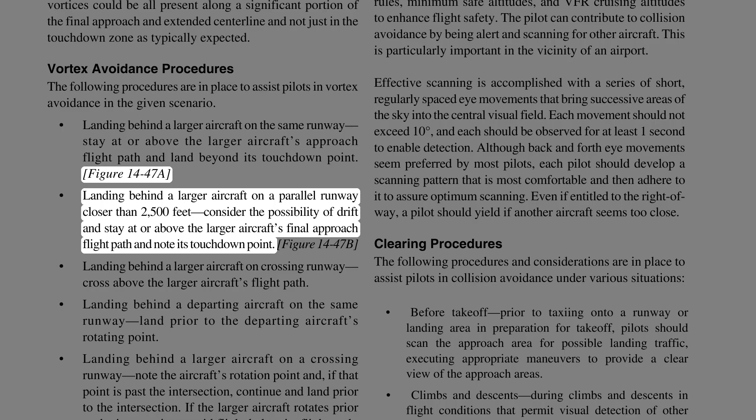Vortex avoidance procedures. The following procedures are in place to assist pilots in vortex avoidance in the given scenario. Landing behind a larger aircraft on the same runway: stay at or above the larger aircraft's approach flight path and land beyond its touchdown point. Figure 14-47A. Landing behind a larger aircraft on a parallel runway closer than 2,500 feet: consider the possibility of drift, stay at or above the larger aircraft's final approach flight path, and note its touchdown point. Figure 14-47B.

Landing behind a larger aircraft on a crossing runway: cross above the larger aircraft's flight path. Landing behind a departing aircraft on the same runway: land prior to the departing aircraft's rotation point.

Landing behind a larger aircraft on a crossing runway: note the aircraft's rotation point, and if that point is past the intersection, continue and land prior to the intersection. If the larger aircraft rotates prior to the intersection, avoid flight below its flight path. Abandon the approach unless a landing is ensured well before reaching the intersection. Figure 14-47C.

Departing behind a large aircraft. Rotate prior to the large aircraft's rotation point and climb above its climb path until turning clear of the wake. For intersection takeoffs on the same runway, be alert to adjacent larger aircraft operations, particularly upwind of the runway of intended use. If an intersection takeoff clearance is received, avoid headings that cross below the larger aircraft's path.

If departing or landing after a large aircraft executing a low approach, missed approach, or touch and go landing: since vortices settle and move laterally near the ground, the vortex hazard may exist along the runway and in the flight path. Particularly in a quartering tailwind, it is prudent to wait at least 2 minutes prior to a takeoff or landing. En route, it is advisable to avoid a path below and behind a large aircraft, and if a large aircraft is observed above on the same track, change the aircraft position laterally and preferably upwind.

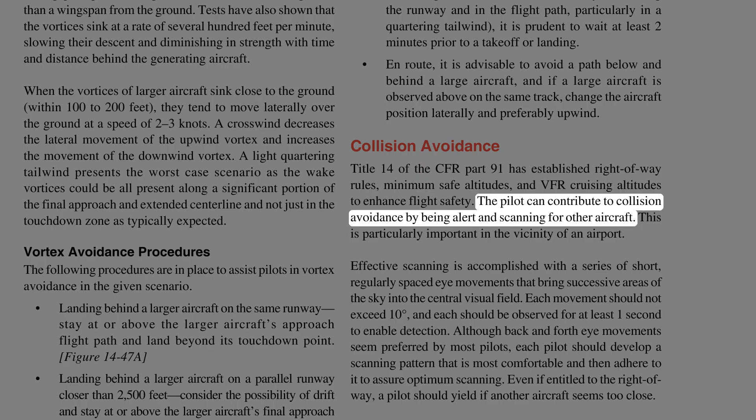Collision avoidance. Title 14 of the CFR Part 91 has established right-of-way rules, minimum safe altitudes, and VFR cruising altitudes to enhance flight safety. The pilot can contribute to collision avoidance by being alert and scanning for other aircraft. This is particularly important in the vicinity of an airport. Effective scanning is accomplished with a series of short, regularly spaced eye movements that bring successive areas of the sky into the central visual field.

Each movement should not exceed 10 degrees, and each should be observed for at least 1 second to enable detection. Although back and forth eye movements seem preferred by most pilots, each pilot should develop a scanning pattern that is most comfortable and then adhere to it to assure optimum scanning. Even if entitled to the right-of-way, a pilot should yield if another aircraft seems too close. The following procedures and considerations are in place to assist pilots in collision avoidance under various situations.

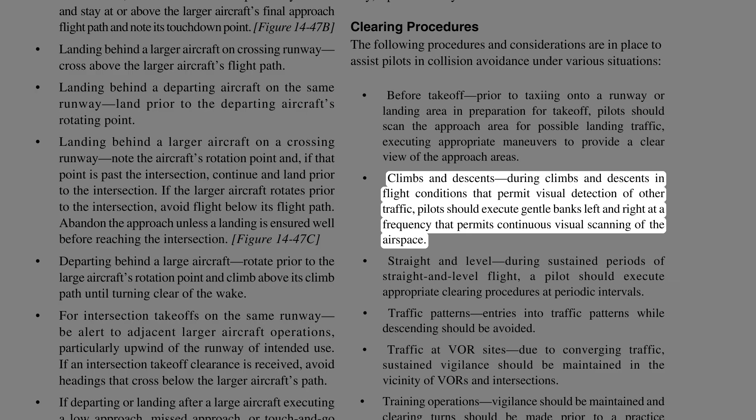Before takeoff. Prior to taxiing onto a runway or landing area in preparation for takeoff, pilots should scan the approach area for possible landing traffic, executing appropriate maneuvers to provide a clear view of the approach areas. Climbs and descents. During climbs and descents in flight conditions that permit visual detection of other traffic, pilots should execute gentle banks left and right at a frequency that permits continuous visual scanning of the airspace. Straight and level. During sustained periods of straight and level flight, a pilot should execute appropriate clearing procedures at periodic intervals. Traffic patterns. Entries into traffic patterns while descending should be avoided.

Traffic at VOR sites. Due to converging traffic, sustained vigilance should be maintained in the vicinity of VORs and intersections. Training operations. Vigilance should be maintained and clearing turns should be made prior to a practice maneuver. During instruction, the pilot should be asked to verbalize the clearing procedures, call out, clear left, right, above, and below. Figure 14-47. Vortex avoidance procedures.

High-wing and low-wing aircraft have their respective blind spots. The pilot of a high-wing aircraft should momentarily raise the wing in the direction of the intended turn and look for traffic prior to commencing the turn. The pilot of a low-wing aircraft should momentarily lower the wing and look for traffic prior to commencing the turn. Training operations. Operators of pilot training programs are urged to adopt the following practices. Pilots undergoing flight instruction at all levels should be requested to verbalize clearing procedures, call out, clear, left, right, above, or below, to instill and sustain the habit of vigilance during maneuvering.

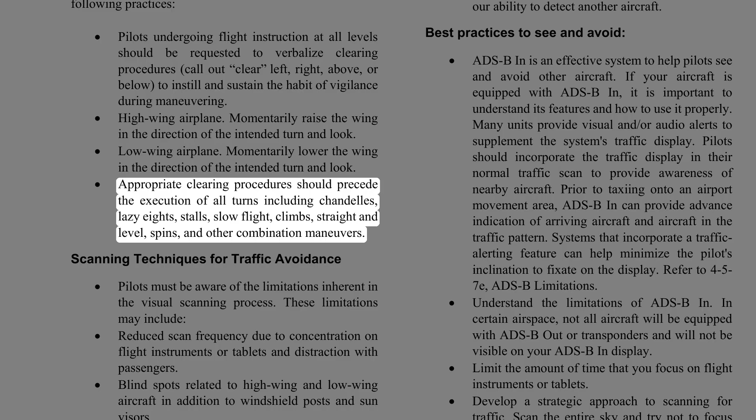High-wing airplane. Momentarily raise the wing in the direction of the intended turn and look. Low-wing airplane. Momentarily lower the wing in the direction of the intended turn and look. Appropriate clearing procedures should precede the execution of all turns, including chandelles, lazy 8s, stalls, slow flight, climbs, straight and level, spins, and other combination maneuvers. Scanning techniques for traffic avoidance.

Pilots must be aware of the limitations inherent in the visual scanning process. These limitations may include reduced scan frequency due to concentration on flight instruments or tablets and distraction with passengers. Blind spots related to high-wing and low-wing aircraft in addition to windshield posts and sun visors. Prevailing weather conditions including reduced visibility and the position of the sun. The attitude of the aircraft will create additional blind spots. The physical limitations of the human eye, including the time required to focus on near and far objects, from the instruments to the horizon for example. Empty field myopia, narrow field of vision and atmospheric lighting all affect our ability to detect another aircraft.

Best practices to see and avoid. ADS-B In is an effective system to help pilots see and avoid other aircraft. If your aircraft is equipped with ADS-B In, it is important to understand its features and how to use it properly. Many units provide visual and/or audio alerts to supplement the system's traffic display.

Pilots should incorporate the traffic display in their normal traffic scan to provide awareness of nearby aircraft. Prior to taxiing onto an airport movement area, ADS-B In can provide advance indication of arriving aircraft and aircraft in the traffic pattern. Systems that incorporate a traffic alerting feature can help minimize the pilot's inclination to fixate on the display. Refer to 4-5-7E, ADS-B limitations.

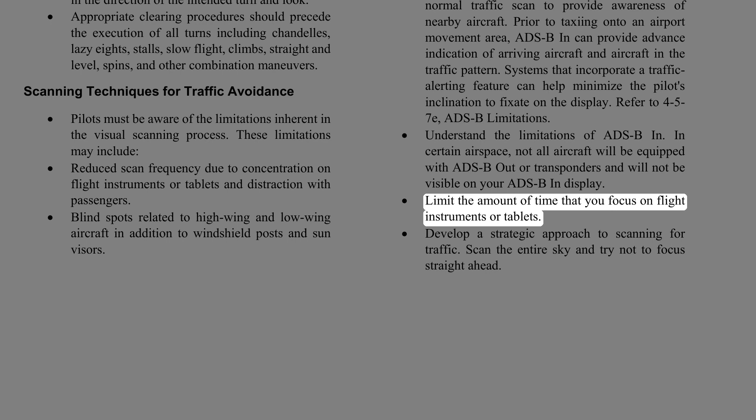Understand the limitations of ADS-B In. In certain airspace, not all aircraft will be equipped with ADS-B or transponders and will not be visible on your ADS-B In display. Limit the amount of time that you focus on flight instruments or tablets. Develop a strategic approach to scanning for traffic. Scan the entire sky and try not to focus straight ahead.

Pilot deviations, PDs. A pilot deviation, PD, is an action of a pilot that violates any federal aviation regulation. While PDs should be avoided, the regulations do authorize deviations from a clearance in response to a traffic alert and collision avoidance system resolution advisory. You must notify ATC as soon as possible following a deviation. Pilot deviations can occur in several different ways.

Airborne deviations result when a pilot strays from an assigned heading or altitude or from an instrument procedure, or if the pilot penetrates controlled or restricted airspace without ATC clearance. To prevent airborne deviations, follow these steps. Plan each flight. You may have flown the flight many times before, but conditions and situations can change rapidly, such as in the case of a pop-up temporary flight restriction, TFR. Take a few minutes prior to each flight to plan accordingly.

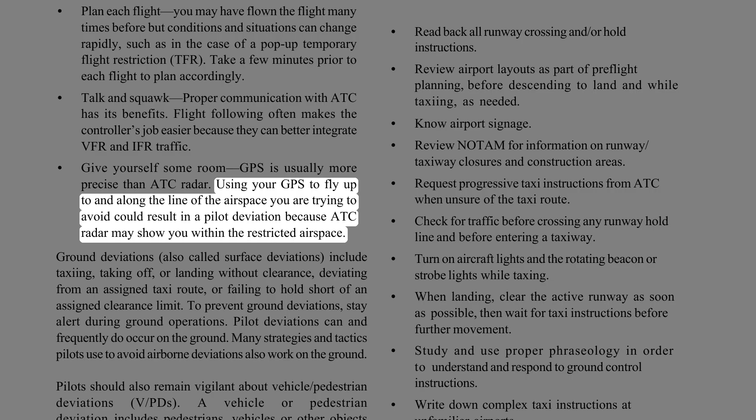Talk and squawk. Proper communication with ATC has its benefits. Flight following often makes the controller's job easier because they can better integrate VFR and IFR traffic. Give yourself some room. GPS is usually more precise than ATC radar. Using your GPS to fly up to and along the line of the airspace you are trying to avoid could result in a pilot deviation because ATC radar may show you within the restricted airspace.

Ground deviations, also called surface deviations, include taxiing, taking off, or landing without clearance, deviating from an assigned taxi route, or failing to hold short of an assigned clearance limit. To prevent ground deviations, stay alert during ground operations. Pilot deviations can and frequently do occur on the ground. Many strategies and tactics pilots use to avoid airborne deviations also work on the ground.

Pilots should also remain vigilant about vehicle/pedestrian deviations, VPDs. A vehicle or pedestrian deviation includes pedestrians, vehicles or other objects interfering with aircraft operations by entering or moving on the runway movement area without authorization. In serious instances, any ground deviation, PD or VPD, can result in a runway incursion. Best practices in preventing ground deviations can be found in the following section under runway incursion avoidance.

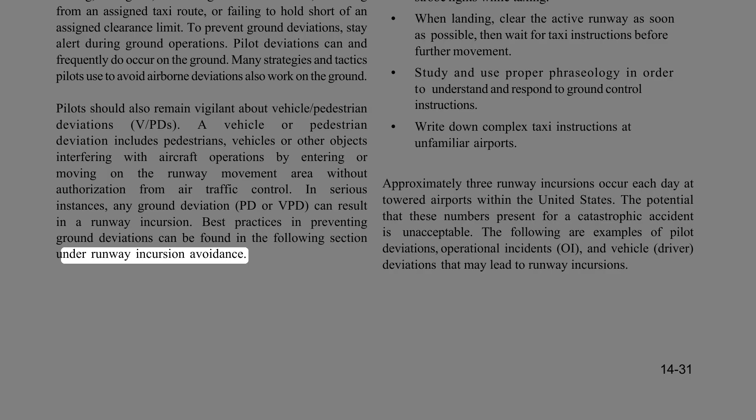Runway incursion avoidance. A runway incursion is any occurrence in the airport runway environment involving an aircraft, vehicle, person, or object on the ground that creates a collision hazard or results in a loss of required separation with an aircraft taking off, intending to take off, landing, or intending to land. It is important to give the same attention to operating on the surface as in other phases of flight. Proper planning can prevent runway incursions and the possibility of a ground collision. A pilot should always be aware of the aircraft's position on the surface at all times and be aware of other aircraft and vehicle operations on the airport.

At times, towered airports can be busy and taxi instructions complex. In this situation, it may be advisable to write down taxi instructions. The following are some practices to help prevent a runway incursion. Read back all runway crossing and/or hold instructions. Review airport layouts as part of pre-flight planning, before descending to land and while taxiing, as needed. Know airport signage. Review NOTAMs for information on runway and taxiway closures and construction areas.

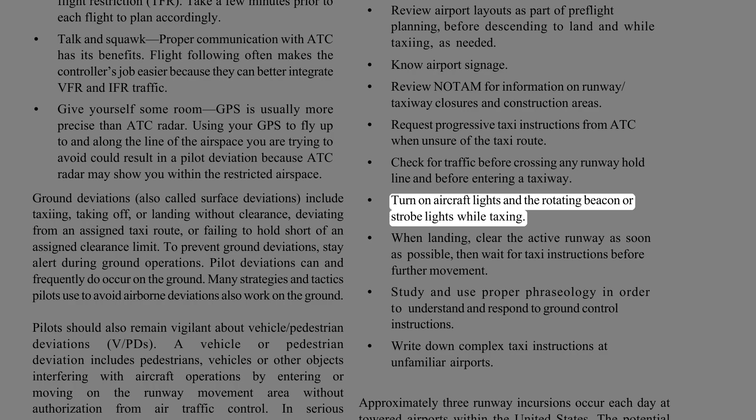Request progressive taxi instructions from ATC when unsure of the taxi route. Check for traffic before crossing any runway hold line and before entering a taxiway. Turn on aircraft lights and the rotating beacon or strobe lights while taxiing. When landing, clear the active runway as soon as possible, then wait for taxi instructions before further movement. Study and use proper phraseology in order to understand and respond to ground control instructions. Write down complex taxi instructions at unfamiliar airports.

Approximately 3 runway incursions occur each day at towered airports within the United States. The potential that these numbers present for a catastrophic accident is unacceptable. The following are examples of pilot deviations, operational incidents, OI, and vehicle/driver deviations that may lead to runway incursions. Pilot deviations: crossing a runway hold marking without clearance from ATC, taking off without clearance, landing without clearance. Operational incidents, OI: clearing an aircraft onto a runway while another aircraft is landing on the same runway.

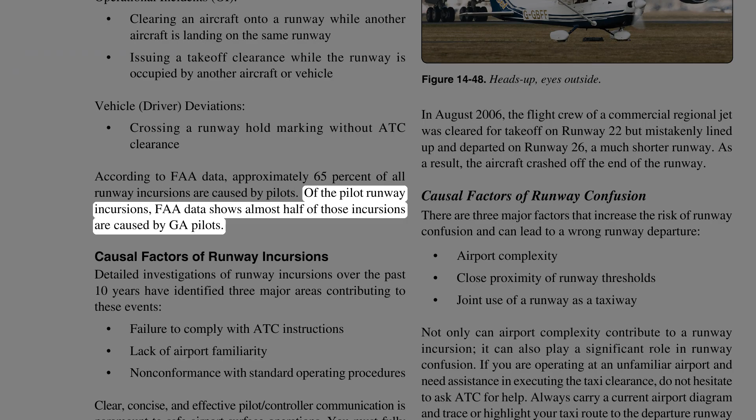Issuing a takeoff clearance while the runway is occupied by another aircraft or vehicle. Vehicle/driver deviations: crossing a runway hold marking without ATC clearance. According to FAA data, approximately 65% of all runway incursions are caused by pilots. Of the pilot runway incursions, FAA data shows almost half of those incursions are caused by GA pilots.

Causal factors of runway incursions. Detailed investigations of runway incursions over the past 10 years have identified 3 major areas contributing to these events: failure to comply with ATC instructions, lack of airport familiarity, and nonconformance with standard operating procedures. Clear, concise, and effective pilot-controller communication is paramount to safe airport surface operations. You must fully understand and comply with all ATC instructions. It is mandatory to read back all runway hold short instructions verbatim.

Taxiing on an unfamiliar airport can be very challenging, especially during hours of darkness or low visibility. A request may be made for progressive taxi instructions, which include step-by-step taxi routing instructions. Ensure you have a current airport diagram, remain heads up, with eyes outside, and devote your entire attention to surface navigation per ATC clearance. All checklists should be completed while the aircraft is stopped. There is no place for non-essential chatter or other activities while maintaining vigilance during taxi.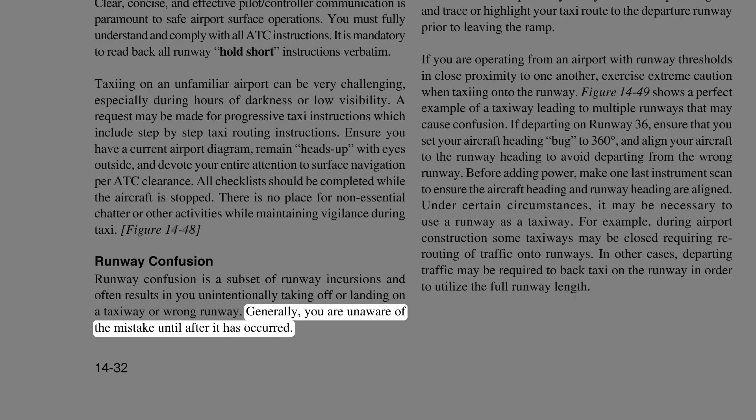Figure 14-48. Runway confusion. Runway confusion is a subset of runway incursions and often results in you unintentionally taking off or landing on a taxiway or wrong runway. Generally, you are unaware of the mistake until after it has occurred. In August 2006, the flight crew of a commercial regional jet was cleared for takeoff on runway 22 but mistakenly lined up and departed on runway 26, a much shorter runway. As a result, the aircraft crashed off the end of the runway.

Causal factors of runway confusion. There are 3 major factors that increase the risk of runway confusion and can lead to a wrong runway departure: airport complexity, close proximity of runway thresholds, and joint use of a runway as a taxiway. Not only can airport complexity contribute to a runway incursion, it can also play a significant role in runway confusion. If you are operating at an unfamiliar airport and need assistance in executing the taxi clearance, do not hesitate to ask ATC for help. Always carry a current airport diagram and trace or highlight your taxi route to the departure runway prior to leaving the ramp.

If you are operating from an airport with runway thresholds in close proximity to one another, exercise extreme caution when taxiing onto the runway. Figure 14-49 shows a perfect example of a taxiway leading to multiple runways that may cause confusion. If departing on runway 36, ensure that you set your aircraft heading bug to 360 degrees, and align your aircraft to the runway heading to avoid departing from the wrong runway. Before adding power, make one last instrument scan to ensure the aircraft heading and runway heading are aligned.

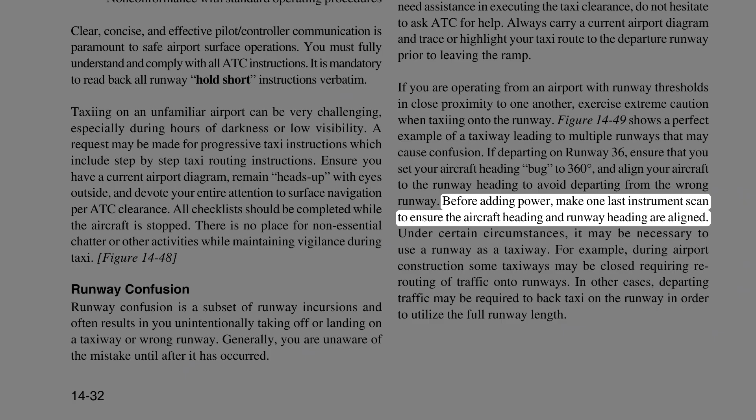Under certain circumstances, it may be necessary to use a runway as a taxiway. For example, during airport construction, some taxiways may be closed, requiring rerouting of traffic onto runways. In other cases, departing traffic may be required to back taxi on the runway in order to utilize the full runway length. Since inattention and confusion often are factors contributing to runway incursion, it is important to remain extremely cautious and maintain situational awareness (SA). When instructed to use a runway as a taxiway, do not become confused and take off on the runway you are using as a taxiway.

ATC Instructions. Title 14 of the Code of Federal Regulations (14 CFR) Part 91, Section 91.123 requires you to follow all ATC clearances and instructions. Request clarification if you are unsure of the clearance or instruction to be followed. If you are unfamiliar with the airport or unsure of a taxi route, ask ATC for a progressive taxi. Progressive taxi requires the controller to provide step-by-step taxi instructions. The final decision to act on ATC's instruction rests with you. If you cannot safely comply with any of ATC's instructions, inform them immediately by using the word unable. There is nothing wrong with telling a controller that you are unable to safely comply with the clearance.

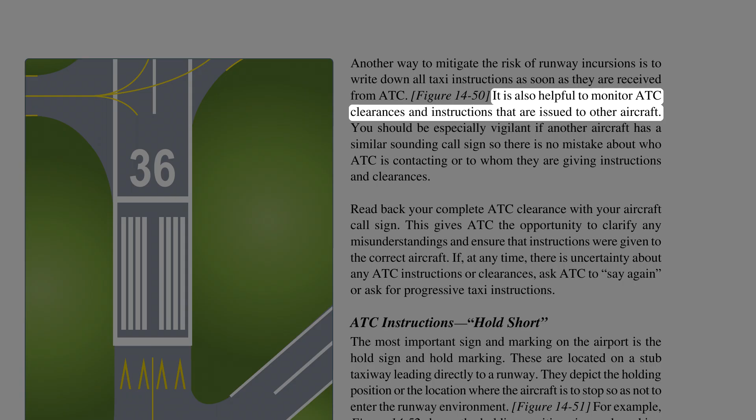Another way to mitigate the risk of runway incursions is to write down all taxi instructions as soon as they are received from ATC. It is also helpful to monitor ATC clearances and instructions that are issued to other aircraft. You should be especially vigilant if another aircraft has a similar sounding call sign, so there is no mistake about who ATC is contacting or to whom they are giving instructions and clearances. Read back your complete ATC clearance with your aircraft call sign. This gives ATC the opportunity to clarify any misunderstandings and ensure that instructions were given to the correct aircraft.

If, at any time, there is uncertainty about any ATC instructions or clearances, ask ATC to say again, or ask for progressive taxi instructions.

ATC instructions: hold short. The most important sign and marking on the airport is the hold sign and hold marking. These are located on a stub taxiway leading directly to a runway. They depict the holding position or the location where the aircraft is to stop so as not to enter the runway environment.

For example, Figure 14-52 shows the holding position sign and marking for runway 13 and runway 31. When ATC issues a hold short clearance, you are expected to taxi up to, but not cross any part of the runway holding marking. At a towered airport, runway hold markings should never be crossed without explicit ATC instructions. Do not enter a runway at a towered airport unless instructions are given from ATC to cross, take off from, or line up and wait on that specific runway.

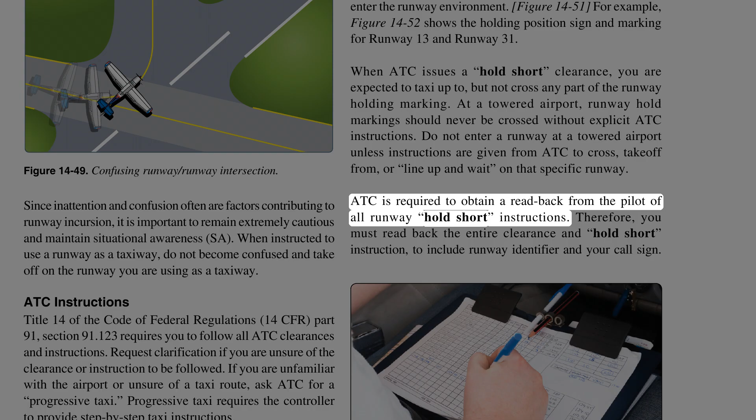ATC is required to obtain a read back from the pilot of all runway hold short instructions. Therefore, you must read back the entire clearance and hold short instruction to include runway identifier and your call sign. Figure 14-53 shows an example of a controller's taxi and hold short instructions and the reply from the pilot.

ATC instructions: explicit runway crossing. As of June 30, 2010, ATC is required to issue explicit instructions to cross or hold short of each runway. Instructions to cross a runway are normally issued one at a time, and an aircraft must have crossed the previous runway before another runway crossing is issued. Exceptions may apply for closely spaced runways that have less than 1,000 feet between centerlines. This applies to all runways to include active, inactive, or closed. Figure 14-54 shows communication between ATC and a pilot who is requesting a taxi clearance.

Extra caution should be used when directed by ATC to taxi onto or across a runway, especially at night and during reduced visibility conditions. Always comply with hold short or crossing instructions when approaching an entrance to a runway. Scan the full length of the runway and the final approaches before entering or crossing any runway, even if ATC has issued a clearance.

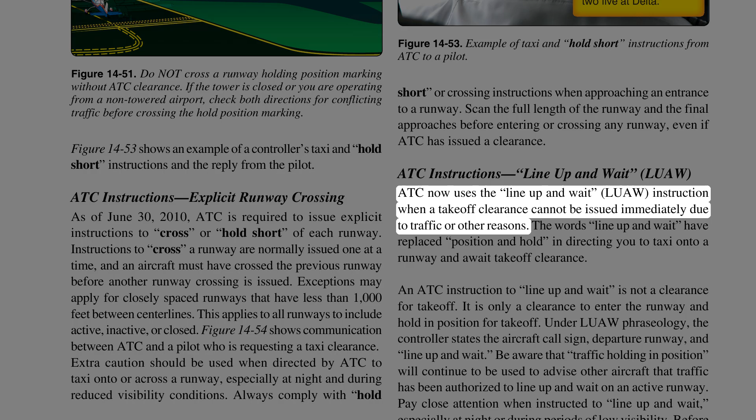ATC instructions: line up and wait, LUAW. ATC now uses the line up and wait, LUAW, instruction when a takeoff clearance cannot be issued immediately due to traffic or other reasons. The words line up and wait have replaced position and hold in directing you to taxi onto a runway and await takeoff clearance. An ATC instruction to line up and wait is not a clearance for takeoff. It is only a clearance to enter the runway and hold in position for takeoff.

Under LUAW phraseology, the controller states the aircraft call sign, departure runway, and line up and wait. Be aware that traffic holding in position will continue to be used to advise other aircraft that traffic has been authorized to line up and wait on an active runway. Pay close attention when instructed to line up and wait, especially at night or during periods of low visibility. Before entering the runway, remember to scan the full length of the runway and its approach end for other aircraft.

There have been collisions and incidents involving aircraft instructed to line up and wait, while ATC waits for the necessary conditions to issue a takeoff clearance. An OI caused a 737 to land on a runway occupied by a twin-engine turboprop. The turboprop was holding in position awaiting takeoff clearance. Upon landing, the 737 collided with the twin-engine turboprop.

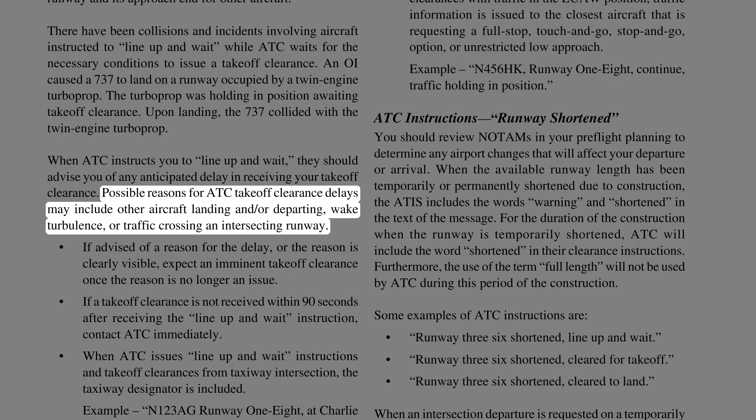When ATC instructs you to line up and wait, they should advise you of any anticipated delay in receiving your takeoff clearance. Possible reasons for ATC takeoff clearance delays may include other aircraft landing and/or departing, wake turbulence, or traffic crossing an intersecting runway. If advised of a reason for the delay, or the reason is clearly visible, expect an imminent takeoff clearance once the reason is no longer an issue. If a takeoff clearance is not received within 90 seconds after receiving the line up and wait instruction, contact ATC immediately.

When ATC issues line up and wait instructions and takeoff clearances from a taxiway intersection, the taxiway designator is included. Example: N123AG, runway 18 at Charlie 3, line up and wait. Example: N123AG, runway 18 at Charlie 3, cleared for takeoff.

If LUAW procedures are being used and landing traffic is a factor, ATC is required to inform the aircraft in the LUAW position of the closest aircraft that is requesting a full stop, touch and go, stop and go, option, or unrestricted low approach. Example: N123AG, runway 18, line up and wait. Traffic a Cessna 210 on a 6-mile final. In some cases, where safety logic is being used, ATC is permitted to issue landing clearances with traffic in the LUAW position.

Traffic information is issued to the landing traffic. Example: N456HK, runway 18, cleared to land, traffic a de Havilland Otter holding in position.

Note: ATC must issue a takeoff clearance to the traffic holding in position in sufficient time to ensure no conflict exists with landing aircraft. Prescribed runway separation must exist no later than when the landing aircraft crosses the threshold.

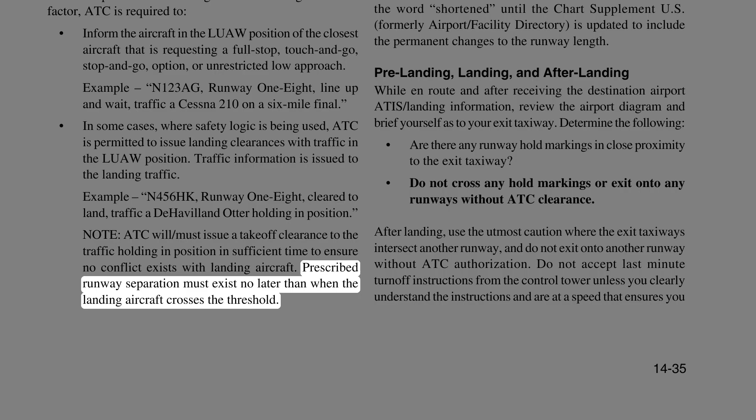In cases where ATC is not permitted to issue landing clearances with traffic in the LUAW position, traffic information is issued to the closest aircraft that is requesting a full stop, touch and go, stop and go, option, or unrestricted low approach. Example: N456HK, runway 18, continue, traffic holding in position.

ATC instructions, runway shortened. You should review NOTAMs in your pre-flight planning to determine any airport changes that will affect your departure or arrival. When the available runway length has been temporarily or permanently shortened due to construction, the ATIS includes the words warning and shortened in the text of the message.

For the duration of the construction, when the runway is temporarily shortened, ATC will include the word shortened in their clearance instructions. Furthermore, the term full length will not be used by ATC during this period. Some examples of ATC instructions are: runway 36 shortened, line up and wait. Runway 36 shortened, cleared for takeoff. Runway 36 shortened, cleared to land.

When an intersection departure is requested on a temporarily or permanently shortened runway during the construction, the remaining length of runway is included in the clearance. For example, runway 36 at Echo, intersection departure, 5,600 feet available. If following the construction the runway is permanently shortened, ATC will include the word shortened until the Chart Supplement US, formerly Airport Facility Directory, is updated to include the permanent changes to the runway length.

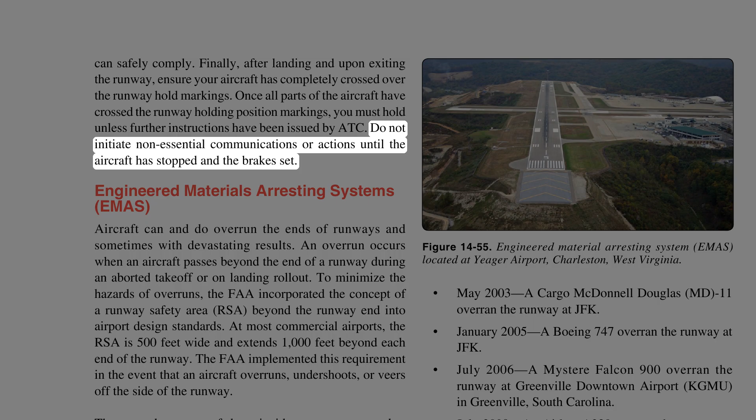Engineered Materials Arresting Systems, EMAS. Aircraft can and do overrun the ends of runways, sometimes with devastating results. An overrun occurs when an aircraft passes beyond the end of a runway during an aborted takeoff or on landing rollout.

To minimize the hazards of overruns, the FAA incorporated the concept of a runway safety area, RSA, beyond the runway end into airport design standards. At most commercial airports, the RSA is 500 feet wide and extends 1,000 feet beyond each end of the runway.

The FAA implemented this requirement in the event that an aircraft overruns, undershoots, or veers off the side of the runway. The most dangerous of these incidents are overruns, but since many airports were built before the 1,000-foot RSA length was adopted some 20 years ago, many airports cannot achieve the full standard RSA beyond the runway end. This is due to obstacles such as bodies of water, highways, railroads, populated areas, or severe drop-off of terrain.

Under these specific circumstances, the installation of an Engineered Materials Arresting System, EMAS, is an acceptable alternative to an RSA beyond the runway end. It provides a level of safety that is generally equivalent to a full RSA.

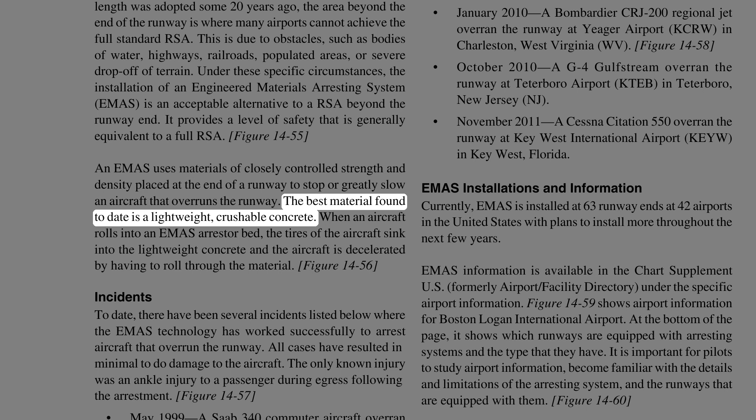An EMAS uses materials of closely controlled strength and density placed at the end of a runway to stop or greatly slow an aircraft that overruns the runway. The best material found to date is a lightweight, crushable concrete. When an aircraft rolls into an EMAS arrestor bed, the tires sink into the lightweight concrete and the aircraft is decelerated by having to roll through the material.

Incidents. To date, there have been several incidents listed below where EMAS technology has worked successfully to arrest aircraft that overrun the runway. All cases have resulted in minimal to no damage to the aircraft. The only known injury was an ankle injury to a passenger during egress following the arrestment.

May 1999, a Saab 340 commuter aircraft overran the runway at John F. Kennedy International Airport, JFK.

May 2003, a cargo McDonnell Douglas MD-11 overran the runway at JFK. January 2005, a Boeing 747 overran the runway at JFK. July 2006, a Mystere Falcon 900 overran the runway at Greenville Downtown Airport, KGMU, in Greenville, South Carolina. July 2008, an Airbus A320 overran the runway at O'Hare International Airport, ORD. January 2010, a Bombardier CRJ-200 regional jet overran the runway at Yeager Airport, KCRW, in Charleston, West Virginia. October 2010, a Gulfstream G4 overran the runway at Teterboro Airport, KTEB, in Teterboro, New Jersey. November 2011, a Cessna Citation 550 overran the runway at Key West International Airport in Key West, Florida.

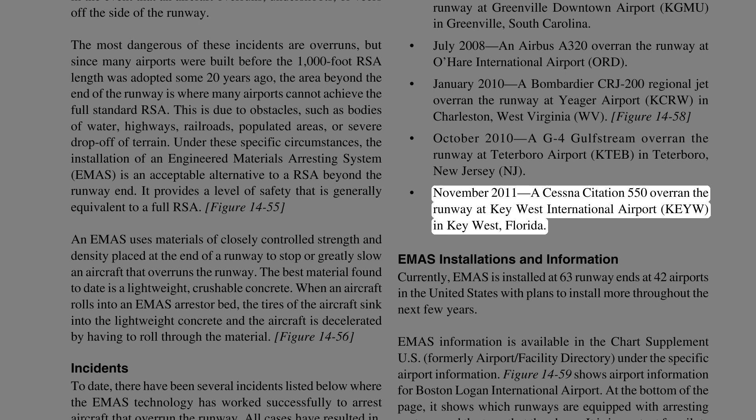EMAS is currently installed at 63 runway ends at 42 airports in the United States, with plans to install more throughout the next few years. EMAS information is available in the Chart Supplement US, formerly the Airport Facility Directory, under the specific airport information.

Figure 14-59 shows airport information for Boston Logan International Airport. At the bottom of the page, it shows which runways are equipped with arresting systems and the type they have. It is important for pilots to study airport information and become familiar with the details and limitations of the arresting system, and the runways equipped with them.

An EMAS-MAX bed is typically the full width of the runway, and the arrestor bed is set back from the end of the runway. The front of an EMAS-MAX bed includes a lead-in ramp to transition the aircraft into the material.

Pilot considerations. Although engaging an EMAS should not be a desired outcome for the end of a flight, pilots need to know what EMAS is, how to identify it on the airfield diagram and on the airfield, as well as knowing what to do should they find themselves approaching an installation in an overrun situation. See Figure 14-59 and Figure 14-60.

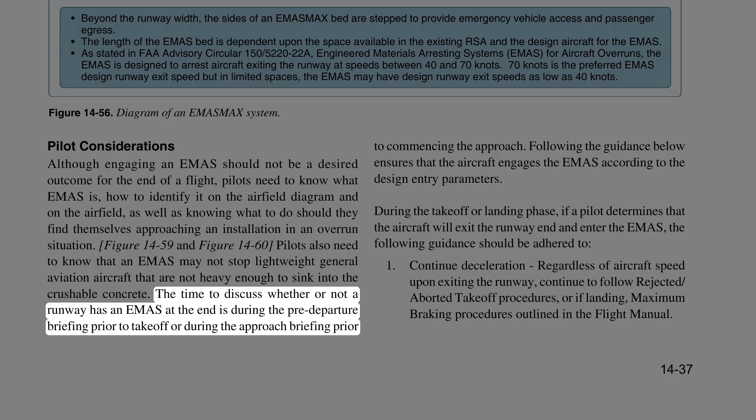Pilots also need to know that an EMAS may not stop lightweight general aviation aircraft that are not heavy enough to sink into the crushable concrete. The time to discuss whether or not a runway has an EMAS at the end is during the pre-departure briefing prior to takeoff, or during the approach briefing prior to commencing the approach.

Following the guidance below ensures that the aircraft engages the EMAS according to the design entry parameters. During takeoff or landing, if a pilot determines that the aircraft will exit the runway end and enter the EMAS, the following guidance should be adhered to: continue deceleration regardless of aircraft speed upon exiting the runway, continuing to follow rejected or aborted takeoff procedures, or if landing, maximum braking procedures outlined in the flight manual.

Maintain runway centerline. Not veering left or right of the bed and continuing straight ahead will maximize stopping capability of the EMAS bed. The quality of deceleration will be best within the confines of the bed. Maintain deceleration efforts; the arrestor bed is a passive system, so this is the only action required by the pilot. Once stopped, do not attempt to taxi or otherwise move the aircraft.

Chapter summary. This chapter focused on airport operations both in the air and on the surface. For specific information about an unfamiliar airport, consult the Chart Supplement US, formerly the Airport Facility Directory, and NOTAMs before flying. For further information regarding procedures discussed in this chapter, refer to 14 CFR Part 91 and the AIM. By adhering to established procedures, both airport operations and safety are enhanced.

This chapter is also designed to help you attain an understanding of the risks associated with surface navigation, and is intended to provide you with basic information regarding the safe operation of aircraft at towered and non-towered airports. This chapter focuses on the following major areas: runway incursion overview, taxi route planning, taxi procedures, communications, and airport signs, markings, and lighting. The chapter identifies best practices to help you avoid errors that may potentially lead to runway incursions. Although the chapter pertains mostly to surface movements for single pilot operations, all of the information is relevant for flight crew operations as well.

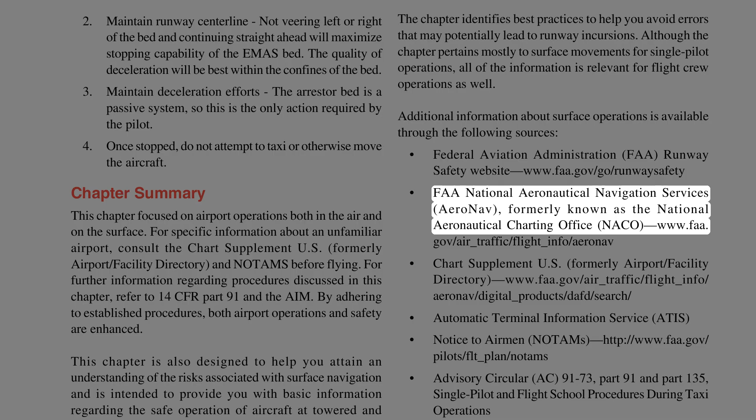Additional information about surface operations is available through the following sources: the FAA Air Traffic Flight Info Aeronav website, the Federal Aviation Administration Runway Safety website at www.faa.gov/go/runwaysafety, the FAA Air Traffic Publications page for the AIM, the Chart Supplement US, formerly the Airport Facility Directory, the FAA National Aeronautical Navigation Services digital products search, Advisory Circular AC 120-74 covering Parts 91, 121, 125, and 135 Flight Crew Procedures during Taxi Operations, Automatic Terminal Information Service, ATIS, Notices to Airmen, NOTAMs, available at www.faa.gov/pilots flight plan NOTAMs, Advisory Circular AC 91-73 covering Part 91 and Part 135 Single Pilot and Flight School Procedures during Taxi Operations, and the Aeronautical Information Manual, AIM.